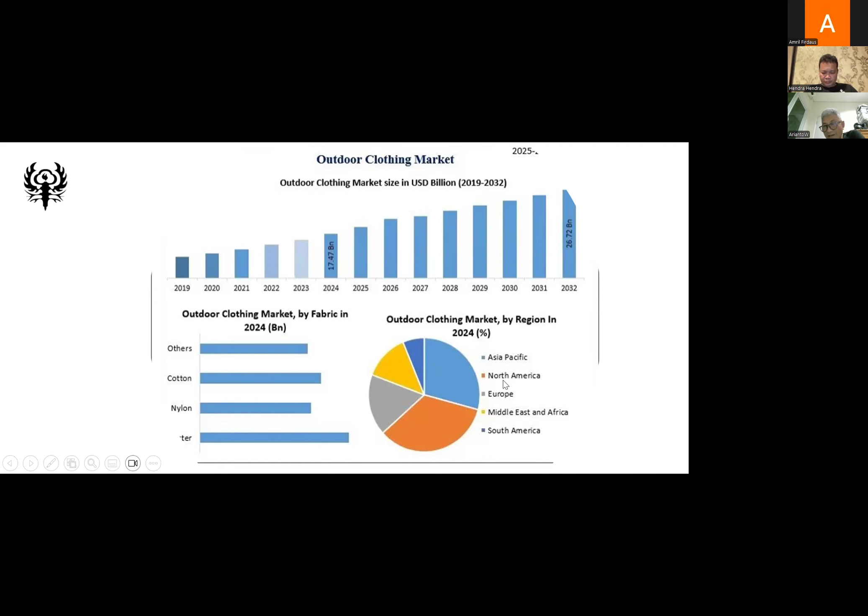So basically, the research uses spacer knit fabric, and they coat it with fluorocarbon resin in an acrylic paste. This process enhances the waterproofness and also the breathability of the fabric, as well as the durability as expected.

The agenda: I've introduced the fabric, and now it will move to the methodology of what they're doing for the spacer fabric, then coating, etc., and all the testing, leading to the results and discussion.

So here we go, we start with the fabrics. This is the fabric they use: double face spacer knit, with the inner face using cotton fibers for comfort, the outer face using polyester, and the spacer using polyester multifilament yarn.

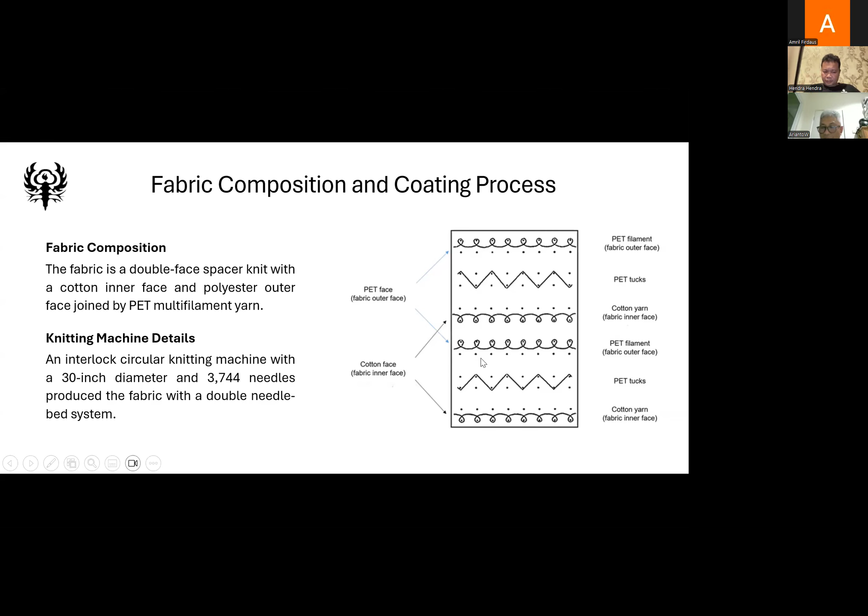Then this fabric goes through the coating process on the polyester face, using 2.7% fluorocarbon resin in 412 grams per meter square of acrylic paste, using screen coating. The samples were dried for 20 minutes at 90 degrees Celsius, then reticulated at 150 degrees Celsius for about 14 minutes.

They use a screen mesh as shown in the diagram, with 26 holes where the pores are in the form of a rectangle. So the resin will be filled into the pores at the polyester side.

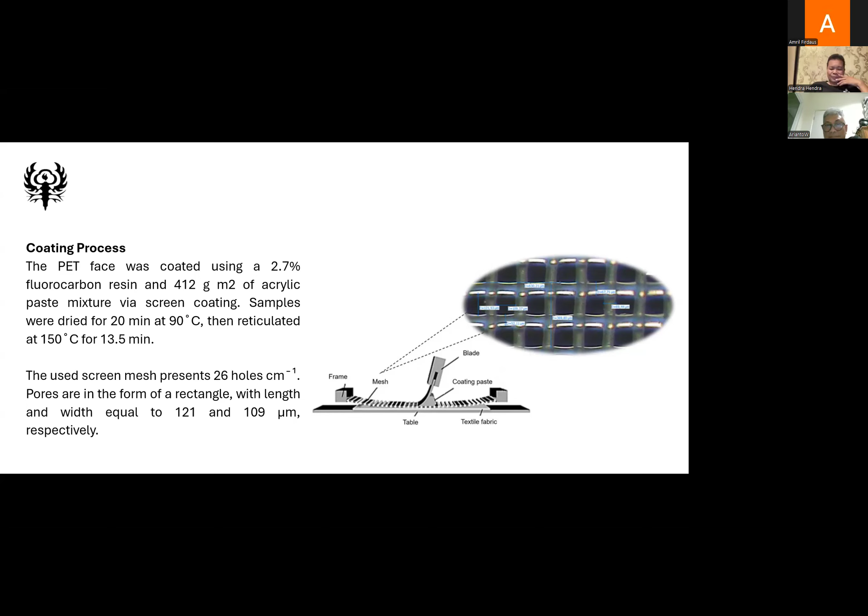So after they finish the fabrics, it goes to evaluation and testing. The objective of the research is to know if this kind of fabric will be durable in real application, so they do some testing.

Before that, they measure the characteristics of the spacer fabric before coating—measuring the thickness, also the titer of the cotton as well as the polyester multifilament, and then also the consumption.

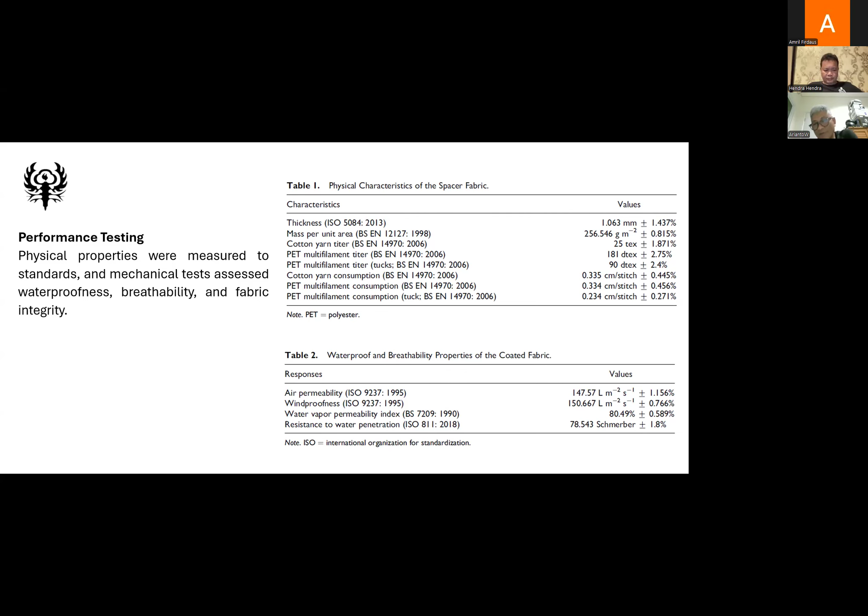It is proven that after coating, the fabric becomes waterproof while still remaining breathable, as measured by air permeability and water vapor permeability. You can see the scores—the waterproofness and windproofness—definitely, it will also function along with the waterproof properties.

And from the same visual, we can see at the left-hand side is the fabric construction. At the top is the fabric before coating, and the bottom is the material after coating. So you can see the fabric, yarn and fiber itself before and after coating. You can see visually by SEM that the material has been coated.

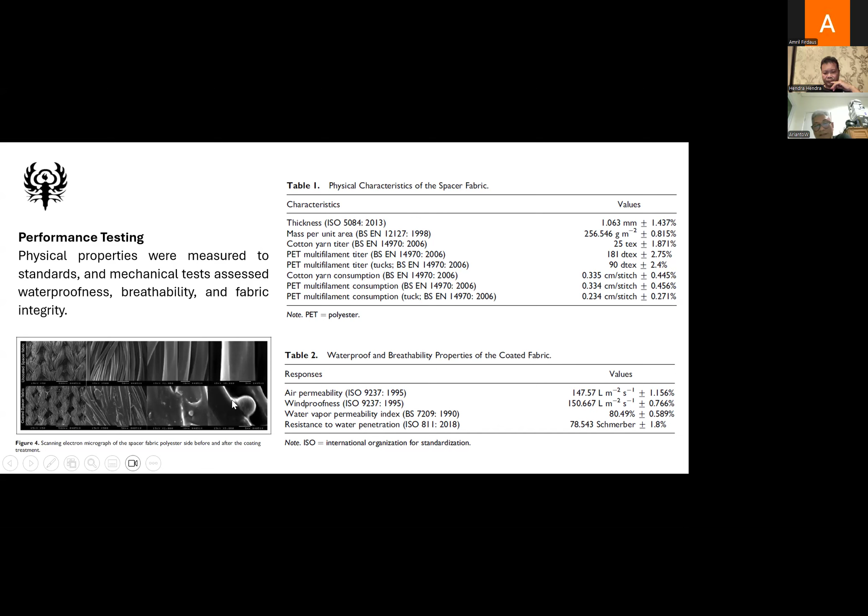Okay, so to prove the objective of the research, they conduct some mechanical testing. The first one is tensile strength, using a Lloyd LS5 machine. They also test the abrasion using Martindale, the fabric stiffness measured using cantilever test, and the recovery assessed by Shirley.

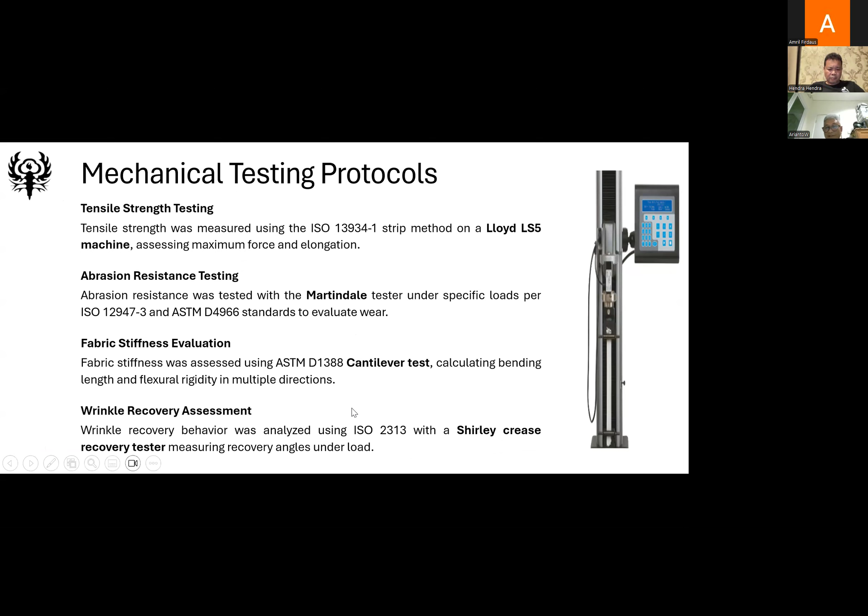So for the coating interface, we can see from the SEM that the coating fills the spaces between the fibers, between the polyester multifilament fibers.

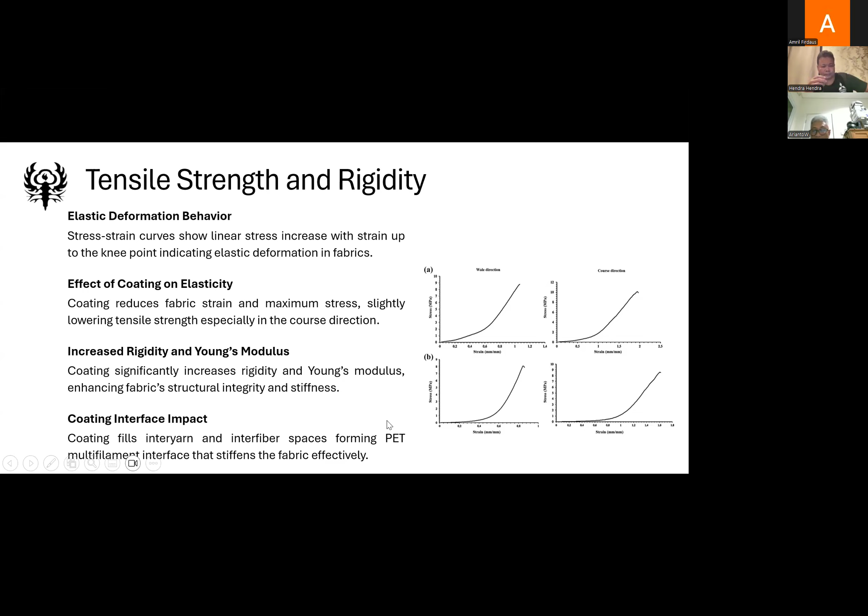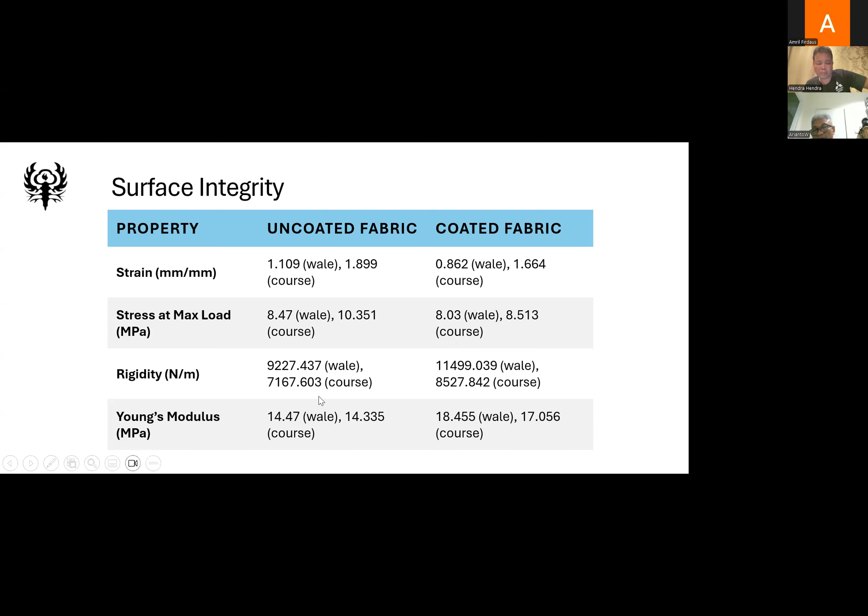And then for the second assessment of surface integrity, we can see a comparison between before and after coating the fabric - both stress and strain decreased a little bit, but the fabric becomes more rigid significantly, as well as the Young modulus also increasing quite significantly.

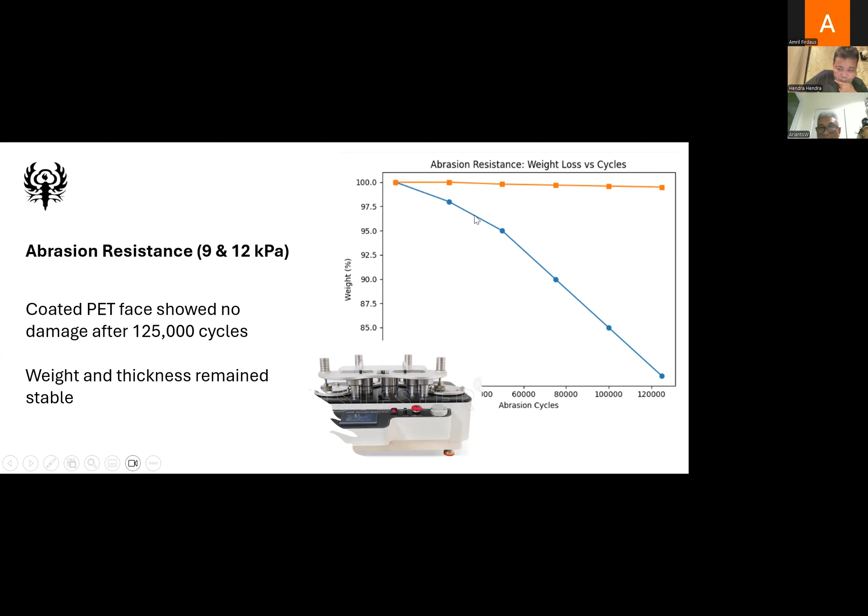Based on the abrasion resistance test, they conducted it two times by 9 and 12 kilopascal. From the diagram we can see that even after 125,000 cycles of the test, the coated polyester face did not occur any damage, as well as the measurement of weight and thickness also remaining stable. The orange line is the coated fabric, and the blue line is the uncoated fabric, so we can see the significant difference affected by the coating process.

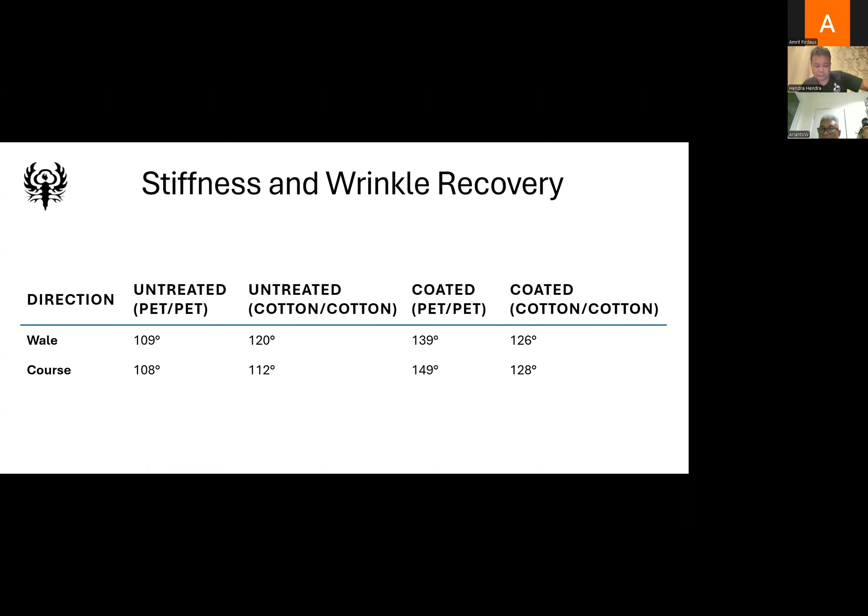And the last one is stiffness and wrinkle recovery. We can see from the angle of the test that the fabric before and after treatment, on both wale and course direction, being increased. That means the fabric is better recovered from the wrinkle.

So they concluded that the mechanical property by the coating has been enhanced by the rigidity and the Young modulus. And the abrasion resistance also has been proven durable, resistant. And they conclude that this kind of fabric is deserved to be used for outdoor wear, something like that. So based on the evaluation, the fabric has durability as well as comfort for clothing and protection.

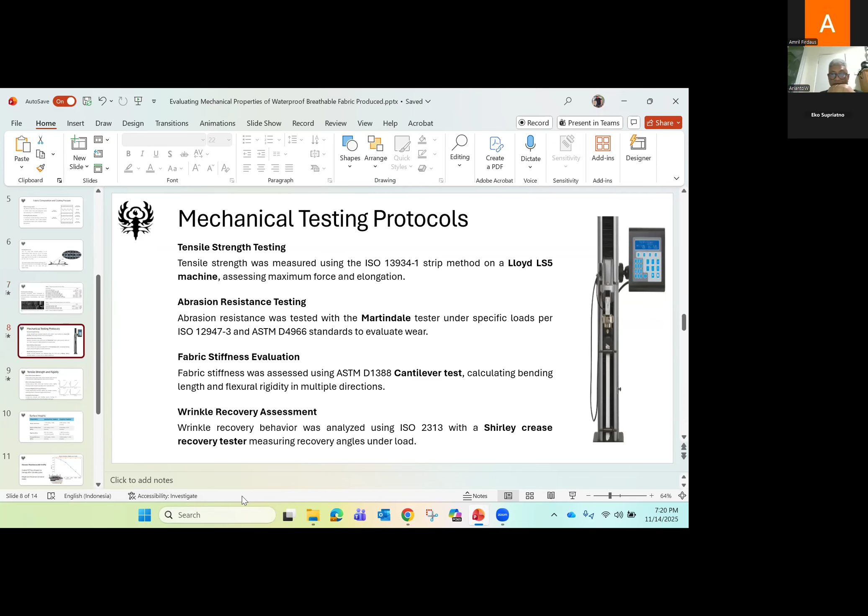So we have, I don't know, maybe 17 students. I don't know if I missed something, but do we have a result for the waterproofness? Result of what? The waterproofness result.

This is the result actually, right? Resistant to water penetration. So after the process, it's measured. To be honest, I don't know what that column means, but it was measured. The waterproofness was measured here, and definitely the windproofness as well.

And is there no other test, like a rain test? The ratio is different. Hydrostatic pressure, I didn't find it in the paper. Okay, I think probably overall the objective is clear.

Pak Yudi, maybe in the beginning you explained about the market of this product, right? Yes. So I want to know, is this product able to be produced in Indonesia, and if yes, which company produces this product?

It's out of topic, Pak. I know, anyway this is out of topic, but you mentioned in this slide that... No, the market, because the paper also mentioned about the background of the research because of the market.

Okay, so now just adding some updates on the market situation. But it is a very good concern, it probably can help the textile business in Indonesia if we can go into this market, because the demand is very high, definitely. We can see all people are very optimistic about how to grow in the coming 10-20 years for this industry.

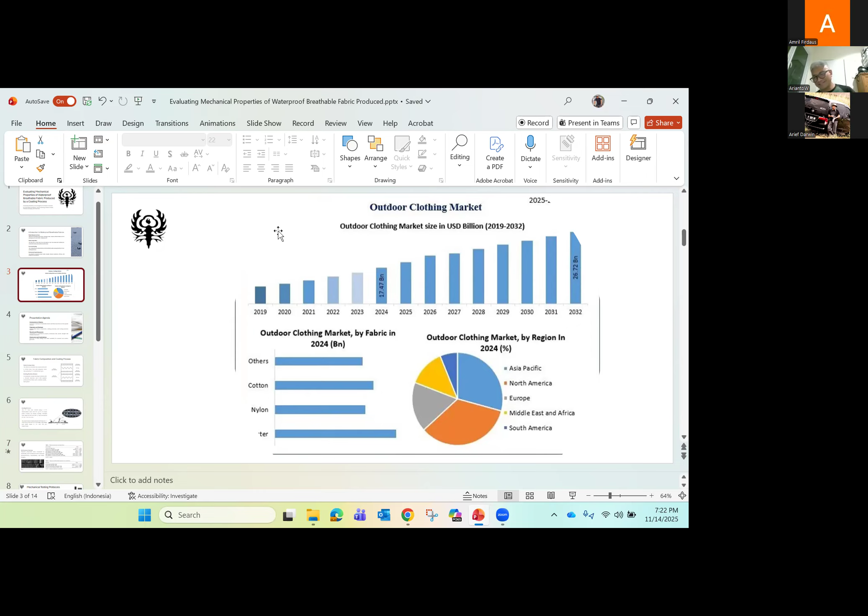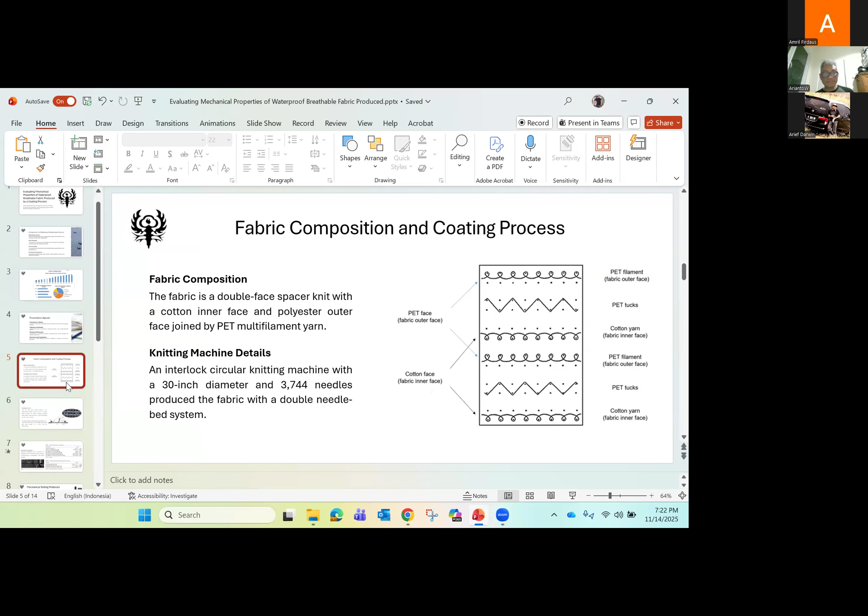Yeah, and I have a question for you on your first slide. Maybe you can scroll up a little bit. Yeah, this one. No, maybe down. Again. One more. Okay, stop, this one? No. Go back, yeah, this one.

I think this is a little bit, I'm not sure whether this is the 412 gram per meter square. It sounds very, very heavy, it looks like more than the weight of the fabric itself. So the coating normally ranges from 20 up to 40 GSM. Yeah, okay, maybe this is wrong numbers.

And in fact, Indra, for the type of coating that you mentioned in this paper, definitely it can be done in Indonesia.

Libolon can do - wait, I see. Pak Arif is the expert, Pak. No, he doesn't work for this industry. I am the user, not the manufacturer of this fabric. I'm the user.

So Pak Arif, you mean that the 412 is too high? Too low? Too heavy, too much. I see. Okay, this should be in GSM. Oh, so it's too heavy.

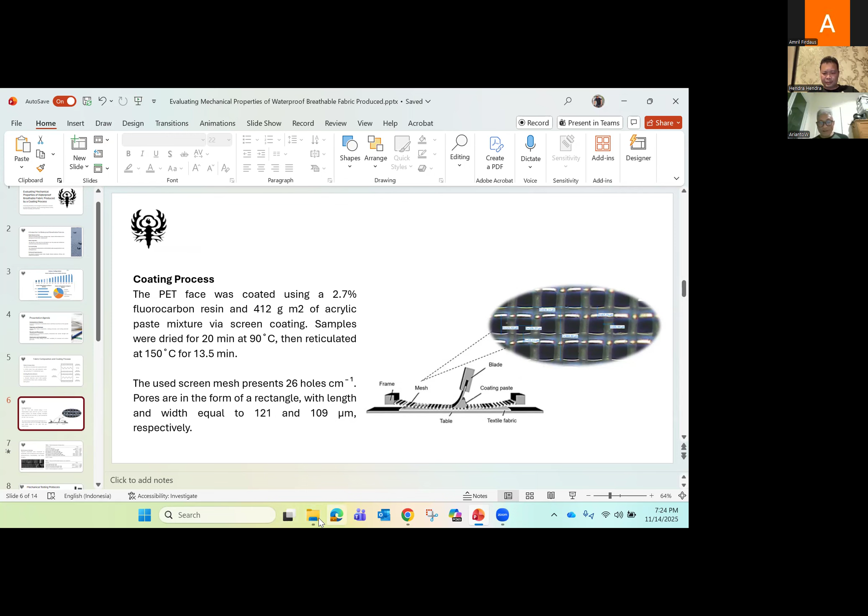Okay, so maybe Pak Yudi can double check the gram per square according to the paper, whether this is correct or not. First coating normally only around 20 up to 40 GSM. Okay, let me check it out. It should be from this one.

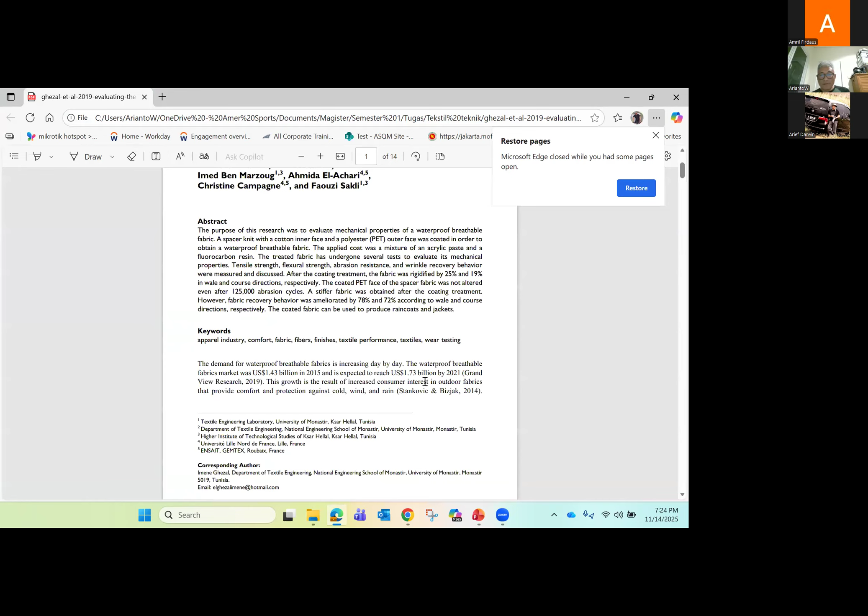Where is that? Maybe Pak Yudi, you can use Humata AI and ask about the grammation. Yeah, this one is correct. Okay, it's saying that. Can you make it bigger, Pak Yudi? I cannot see. Oh, you cannot see.

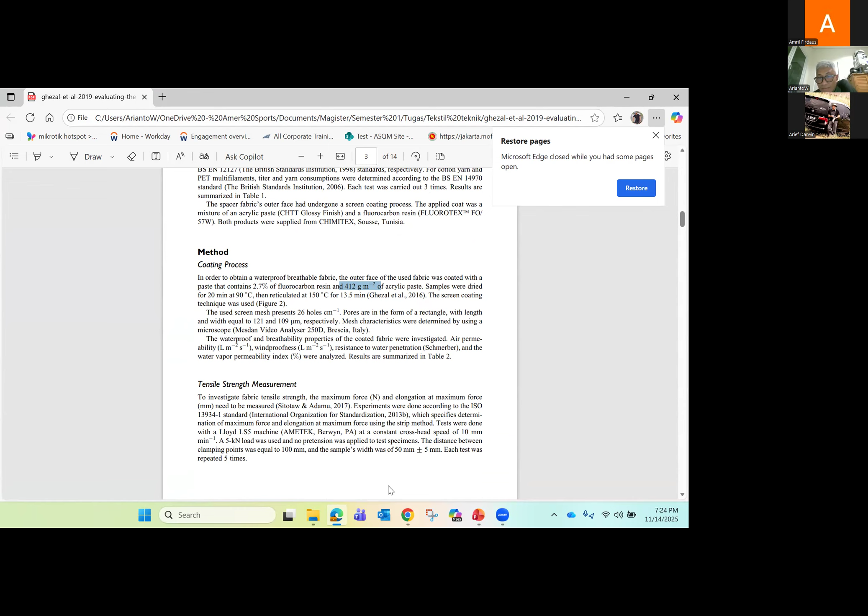Yeah, it says 412 gram per meter squared, but this is definitely wrong numbers - no coating with 412 GSM. You can imagine the fabric itself, maybe not even 400. The fabric is not until 400 grams. It's almost half a kilogram, right? Very heavy fabric.

Good sketch, Pak. Okay, it's a good lesson. Is there any question? There's a -2 above the meter - maybe that is the meaning. It's meaning per meter square, gram per meter square, minus 2. Oh yeah, -2 means per.

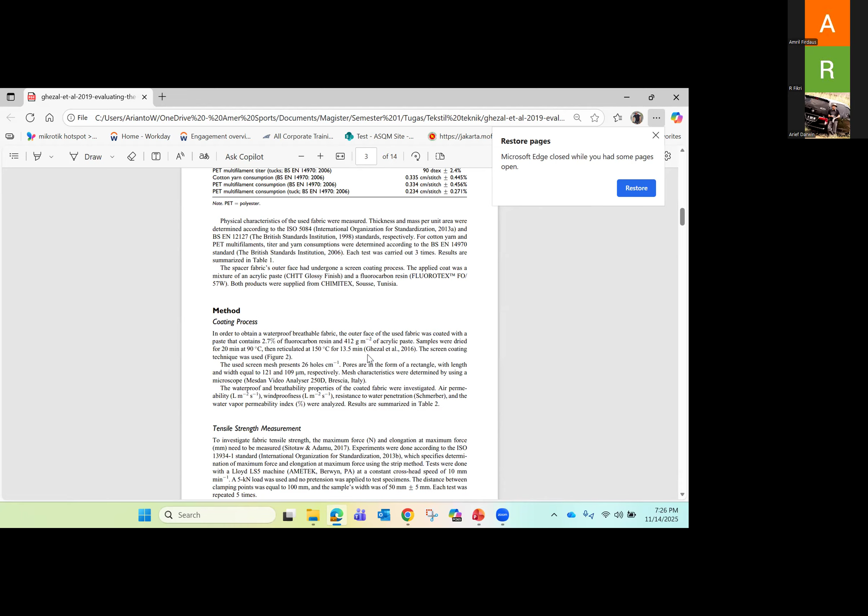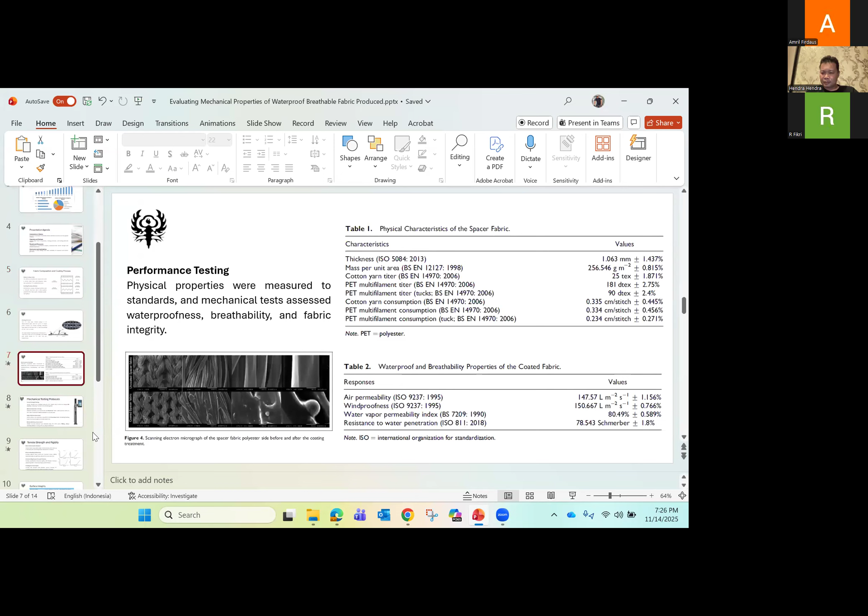Reduced, lower, reduced a little bit. Is there any explanation why the tensile strength is reduced after the coating process? Maybe they mention something why the tensile strength is reduced. I haven't found it. So is it possible that the material becomes a little bit brittle because of the coating process?

When the material is brittle, then the tensile strength is reduced, right? You mean stiffness, yes. Is it the increase in stiffness? It mentions that the fabric becomes stiffer. Maybe that is the reason why the tensile strength has dropped - on the other side, the stiffness is increased.

Yes, okay, it's more rigid, right? It says rigidity is increasing significantly, because of the resin applied into the fabric.

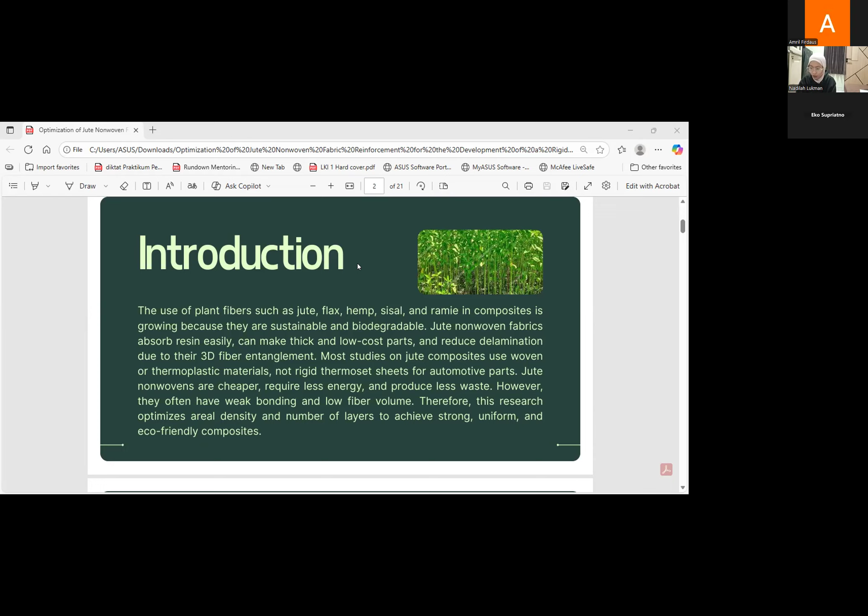The simple background for this paper is they want to make the composite using jute nonwoven, to get a strong, uniform, and eco-friendly composite.

So this is the experimental part. In the paper, they mention 5 parts of the experimental: first is the material, second is nonwoven preparation and properties of nonwoven fabric, experimental design, and the last is preparation of the composite.

The materials used in this paper are Fiberbond B554, methyl ethyl ketone peroxide, cobalt naphthenate, and of course jute fiber.

Before they make the composite, we must prepare the jute nonwoven first. All nonwovens in this paper were prepared by a Dilo machine, like the machine from Germany. This Dilo machine consists of a carding machine, a cross-laying machine, and a needling loom.

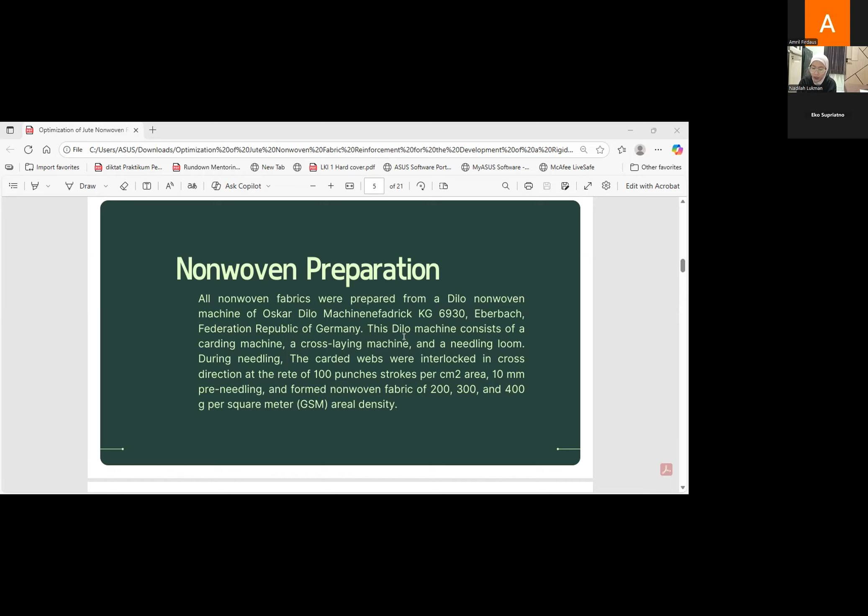During needling, the carded webs interlock in the cross direction at a rate of 100 punch strokes per square centimeter area, with 10 millimeter pre-needling, to form nonwoven fabric of 200, 300, and 400 grams per square meter (GSM) areal density or grammage.

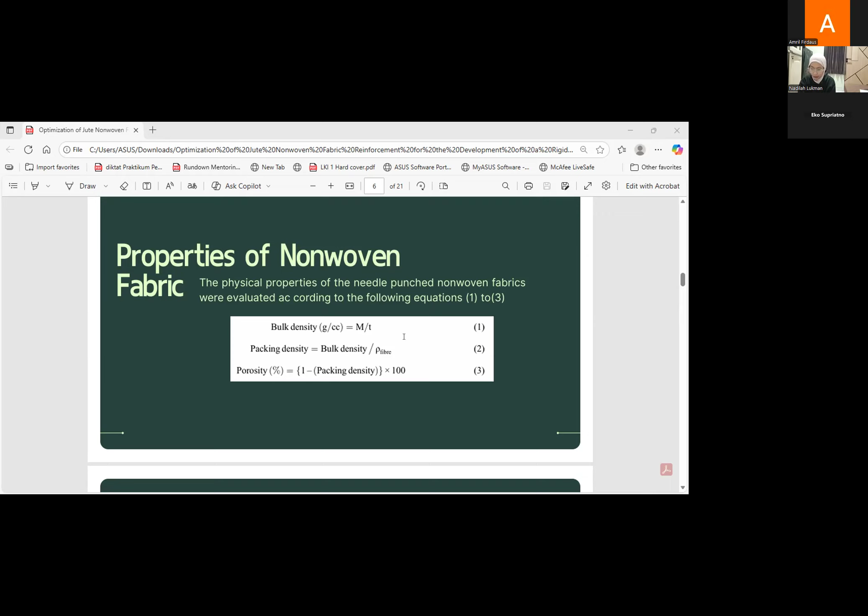To evaluate if this nonwoven is in good condition, they use a formula to evaluate bulk density, packing density, and porosity.

The next part is experimental design. For this paper, they use the Taguchi method. Taguchi method is a method for optimizing experiments - you can look it up on Google or ChatGPT. In this paper, the Taguchi method is used to plan and optimize the experiment using a special design called the orthogonal array.

In the Taguchi method, there are 4 main steps: first is design experimental, second is analyze data, third is finding the best process condition, and the last is verification of the result.

In this study we just focus on two factors, ignoring others. The first is areal density, the second is the number of layers. Areal density varies between 200, 300, and 400 GSM, with 3, 4, and 5 layers.

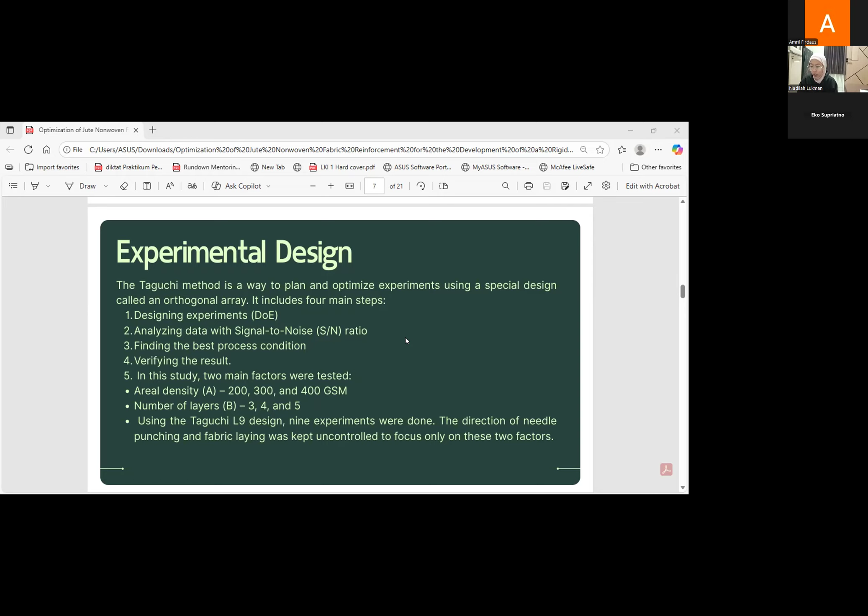Using the Taguchi method, this is called the Taguchi L9 design. 9 experiments were done. The needle punching direction and fabric layering were kept uncontrolled to focus only on these 2 factors.

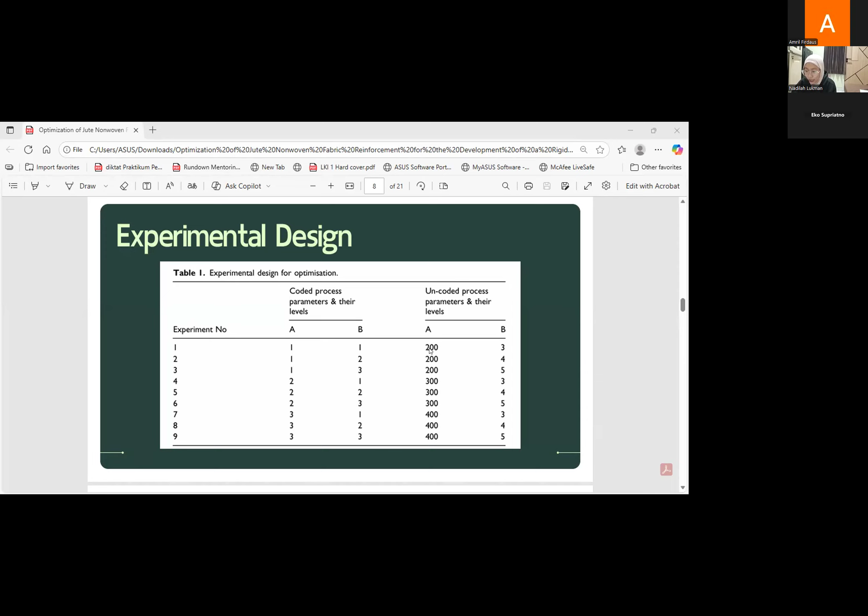This is the table of the experiment with the Taguchi L9 method. This is the sample number, and this is the process code - A is the areal density or grammage, and B is the layering, how many layers in the composite. For example, experiment number 1 has grammage of 200 with 3 repeating layers.

After we finish making the non-woven jute, we start preparing the composite. The composite was prepared using the typical hand lay-up method, followed by compression molding.

We use jute non-woven fabric, made in 60 by 60 centimeter size, dried at 70 degrees Celsius for 2 hours. Then unsaturated polyester resin was mixed with cobalt naphthenate at 2% and methyl ethyl ketone peroxide at 2%. The resin and reinforcement ratio was 1:4, where 1 is the fiber and 4 is the resin.

Next, the resin mixture is applied by brushing and rolling evenly on the fabric. I can show you some pictures for this process. Then comes the resin coating layer — the fabric is stacked in one direction and placed between polyester sheets.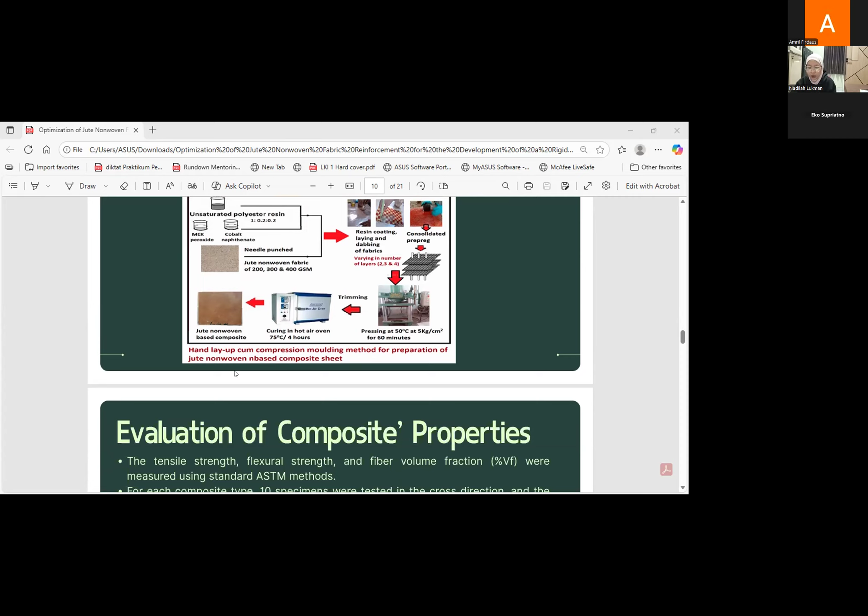Next is the evaluation part of this paper. They used 3 evaluations: tensile strength, flexural strength, and fiber volume fraction, using standard ASTM methods. For each composite type, 10 specimens were tested in the cross direction, and the average value was recorded. Tensile strength was measured using the Instron, flexural strength by the 3-point bending test, and fiber fraction calculated by formula.

Density in this paper was calculated using the Archimedes principle. Lastly, they used SEM analysis to observe the fiber-matrix bonding and voids in the composite sample.

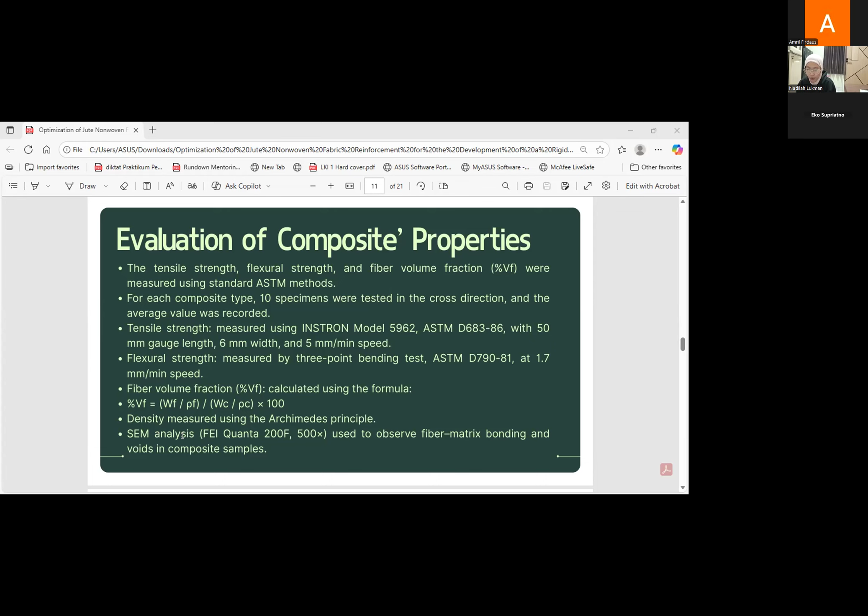This paper uses the Taguchi method L9. After getting the testing results, we must optimize the data. We optimized the data using Minitab 18 software, which can calculate research data.

Basically, the hand lay-up and compression molding method requires skill, work, and time. But with the Taguchi method, the process becomes faster and cheaper for this paper. The signal-to-noise ratio was calculated using the rule 'larger is better,' so in the results we focus on the larger value.

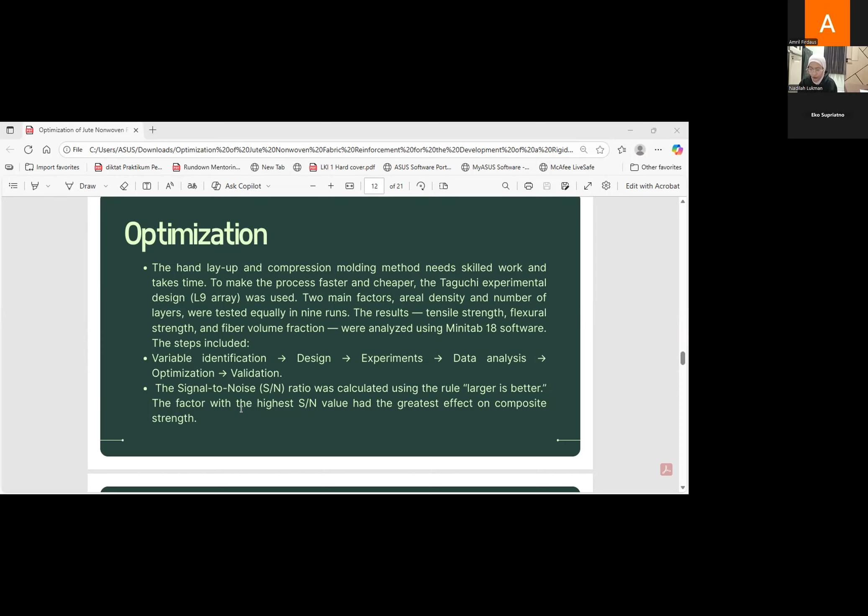Next, I want to explain the results in this class. The results discussion has three parts: properties of the non-woven, properties of the composite, and testing of the composite.

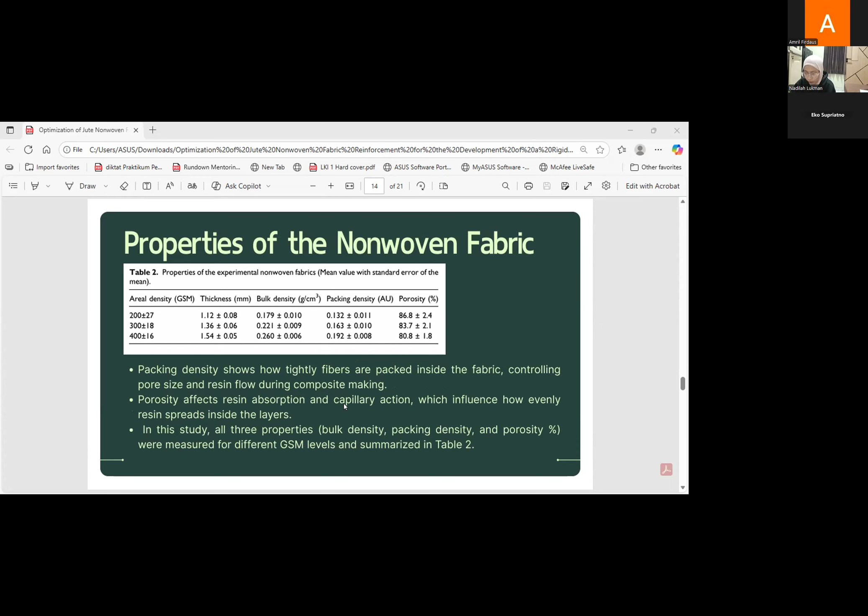This is the property table of the nonwoven fabric. Here they made a summary table explaining the mean value with standard error of the mean. You can read about thickness, bulk density, packing density, and porosity in this part.

Now I want to explain the evaluation of tensile strength of the composite. Tensile strength depends on the strength, amount, and direction of the fiber, and how well they bond with the polymer matrix. In this study, higher areal density increased tensile strength because more fiber carried the load. However, adding more layers reduced strength due to poor stress transfer between them. Our study succeeded in improving fiber-polymer bonding, and fiber interlocking gave a stronger, more uniform structure.

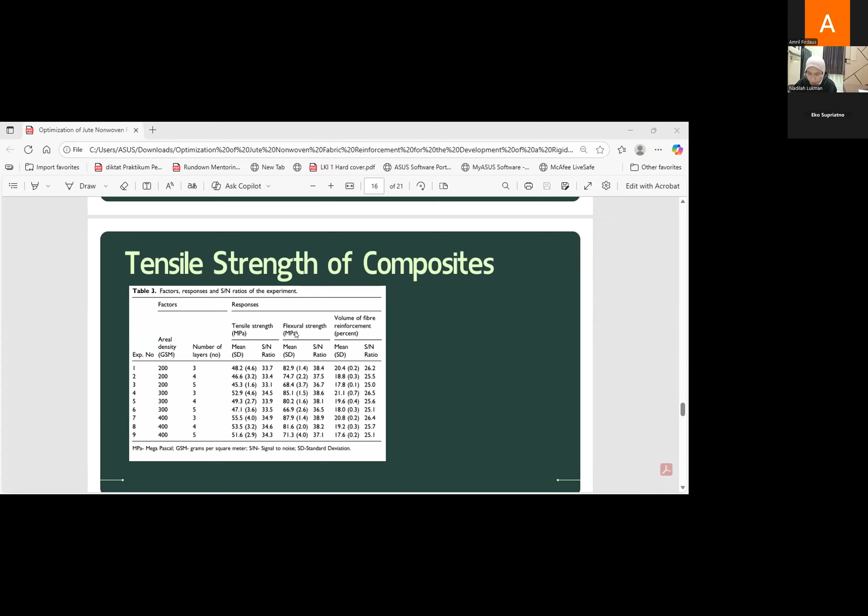You can see the tensile strength value here, guys. This is the result value from the testing — tensile strength, flexural strength, and volume of reinforcement.

As I said before, larger is better. So we can see here the larger value is with 400 areal density and three layering repeats — this shows the higher value, guys.

This is the picture for flexural strength of the composite, from the same instrument. You can see here there is a big hole in the 200 GSM sample. All these pictures show three layers, but with different grammage.

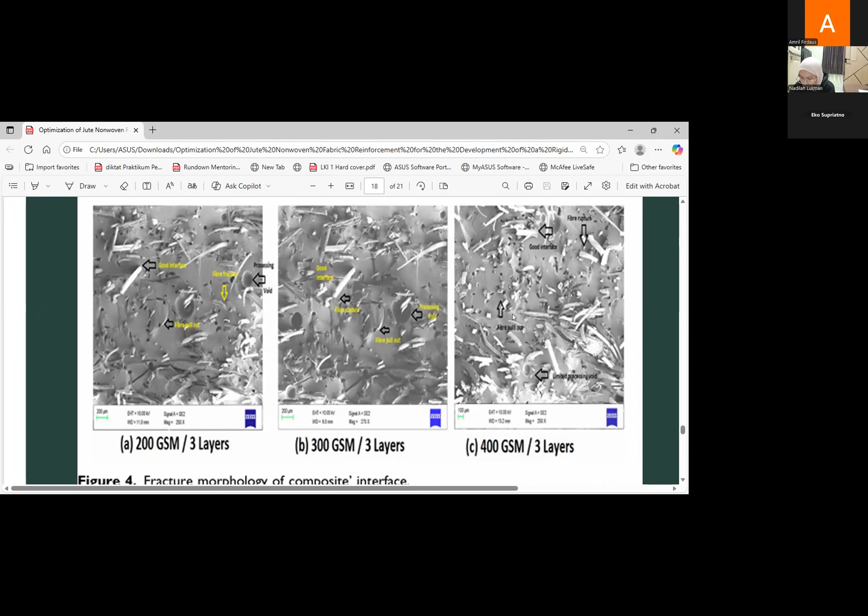In 200 GSM, we can see a big hole, and in 300 GSM we can see a hole too, but not as big as in the 200 GSM. Lastly, in the 400 GSM, we can see this is a small hole.

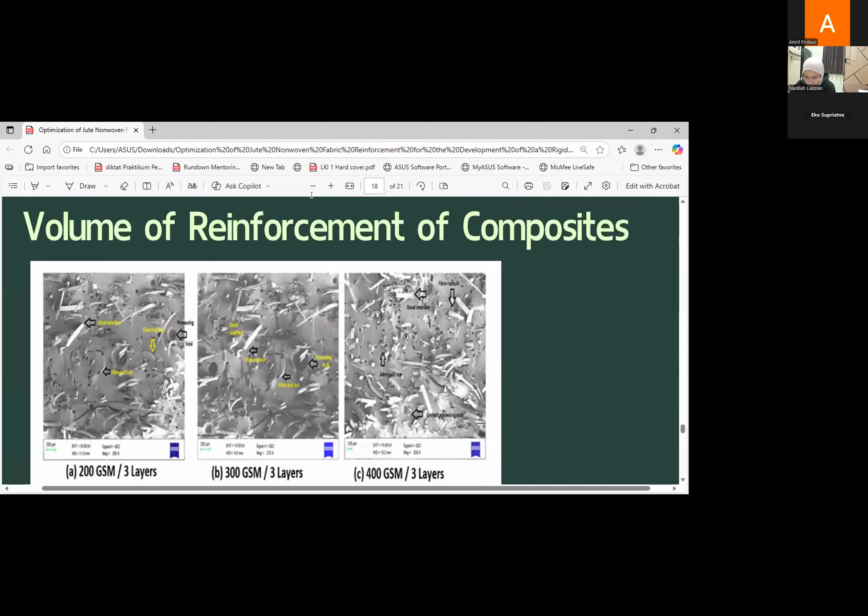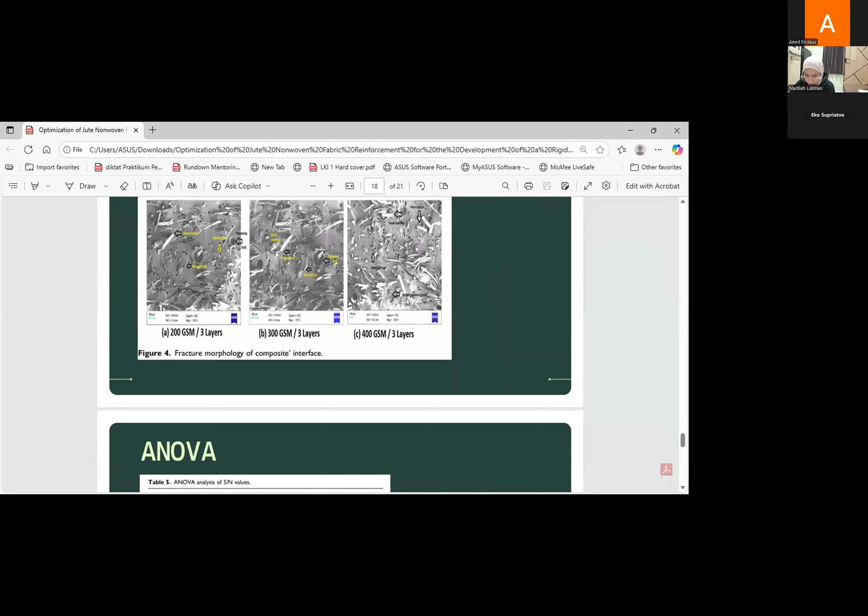So this can give the conclusion that higher grammage is better for reinforcement. In this paper, they used ANOVA to measure and analyze the values.

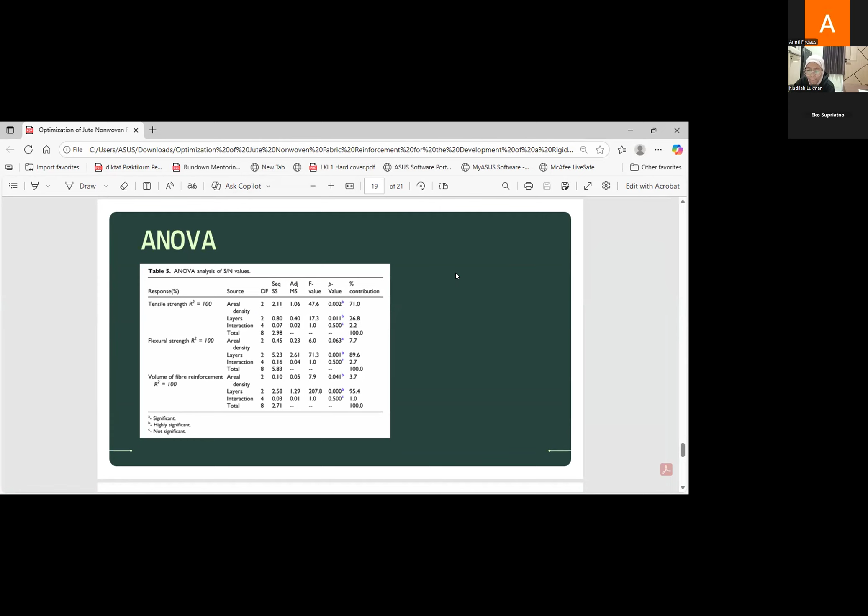So this is the conclusion, guys. In this paper, the conclusion is 400 GSM jute nonwoven in three layers plus polyester resin produced the most effective composite. The optimized composite achieved 55.5 MPa tensile strength and 87.9 MPa flexural strength, with 20.8% fiber volume, meeting automotive specifications.

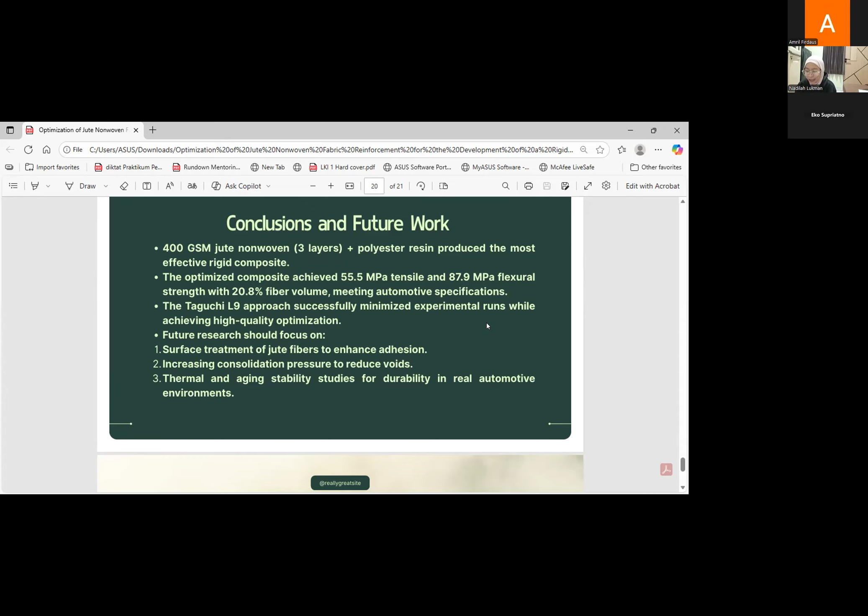This paper explains that the Taguchi L9 approach succeeded with minimal experimental runs while achieving high quality optimization. For future research, they should focus on surface treatment of the jute fiber to enhance adhesion, increasing consolidation pressure to reduce voids, and thermal aging stability studies for durability in the real automotive environment. I know my English is not perfect, but I hope you can understand what I wanted to explain about this paper. Thank you for your attention, guys.

Thank you very much, Nadilah Lukman, for your presentation. I have one suggestion for you to improve your presentation in the future. Looking at your slides, I think you show too many sentences. It's better if you change your sentences into schematic illustrations. For example, can you show me the methodology of this research?

Okay, this is the experimental design. Here in your experimental design, I think it's much better if you use a schematic illustration. How you convert this sentence into a schematic illustration, I already mentioned in my video assignment. You can put this sentence into something like Gemini AI or ChatGPT and ask them to generate a schematic illustration for this sentence. They will generate it, and then you have to double check whether the schematic illustration given is suitable with the sentence or not.

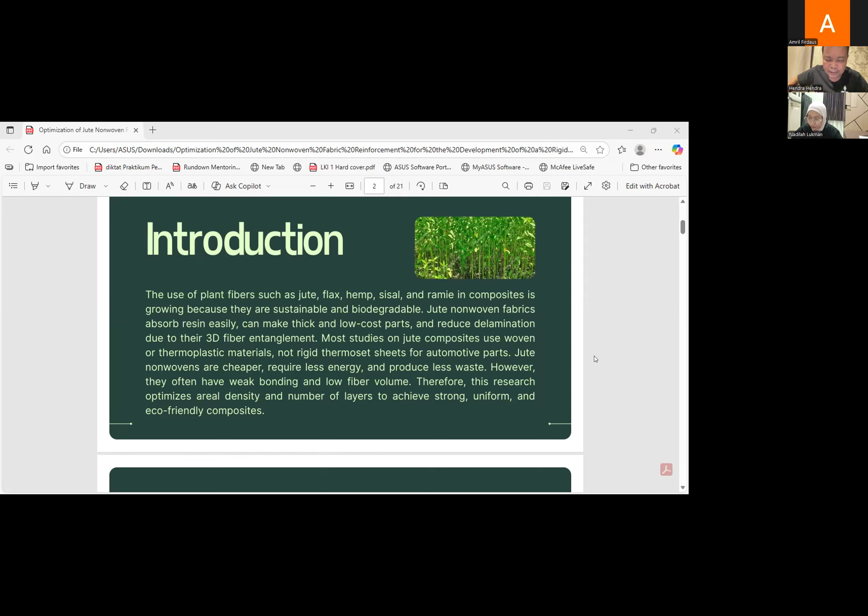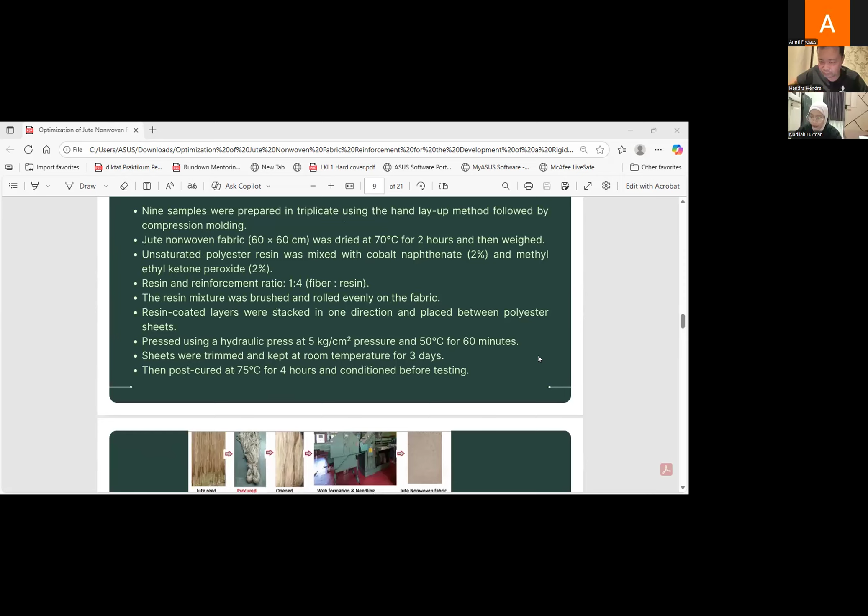As you mentioned, the gram per square of this composite can be adjusted from 200 gram per meter square, 300, and 400, right? Yes. Then my question is, how do we adjust this grammage? We can adjust using the Dilo machine, making the jute non-woven fabric. For 200, 300, and 400 GSM grammage, we can set it in the Dilo machine. The Dilo machine can measure the grammage based on the data we input. So you mean the 200, 300, and 400 can be adjusted from the manufacturing itself, right?

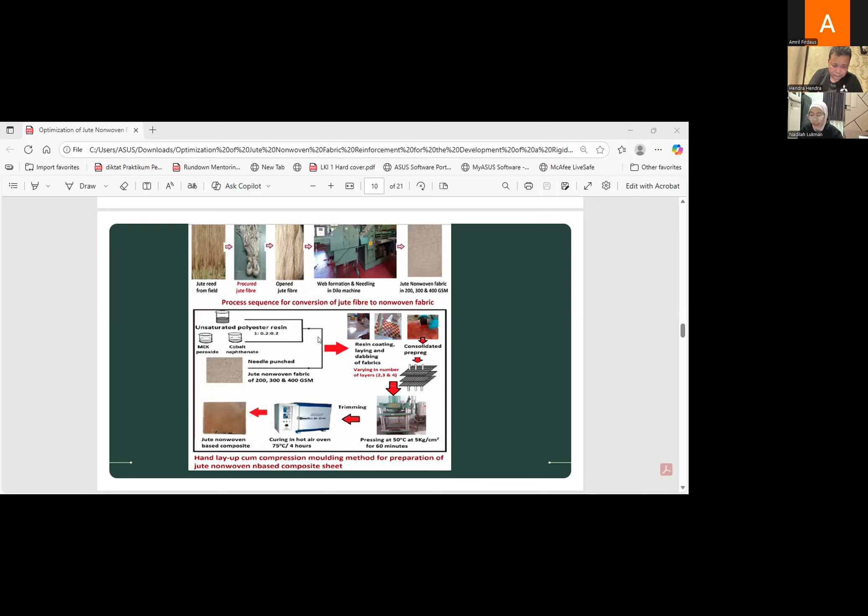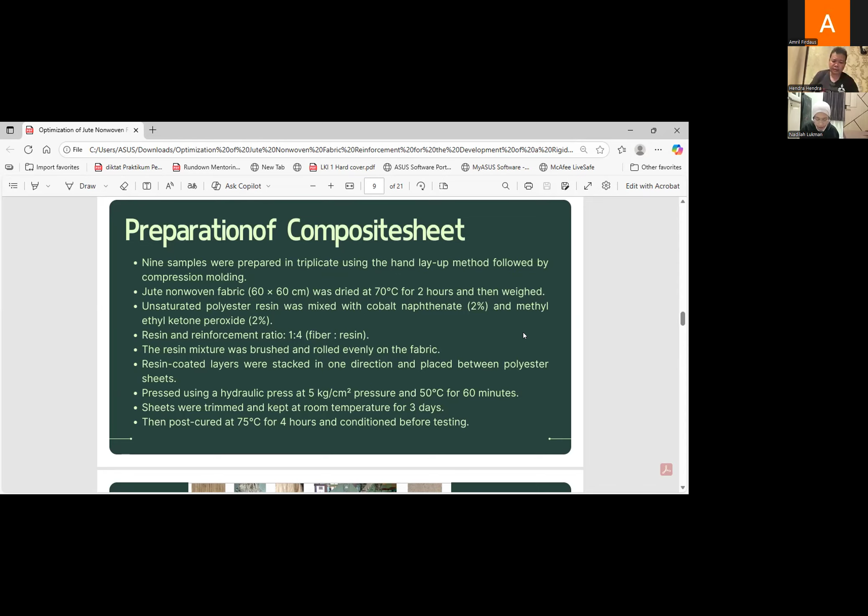Yes. So my next question is, how about the composition ratio between the jute fiber and resin used? Is this ratio by layering? No, this paper used three layers. I mean, if we use 200 gram per square, how many grams of jute and how many grams of resin? Are you using polyester resin or epoxy resin? Polyester resin. Okay, we have to see the ratio, I think before it was 1 to 4. One for what and four for what? One for fiber and four for resin. Oh okay, 1/4, so this is the ratio, right? For example, 1 gram fiber would be 4 gram resin. Is that correct? Yes, correct.

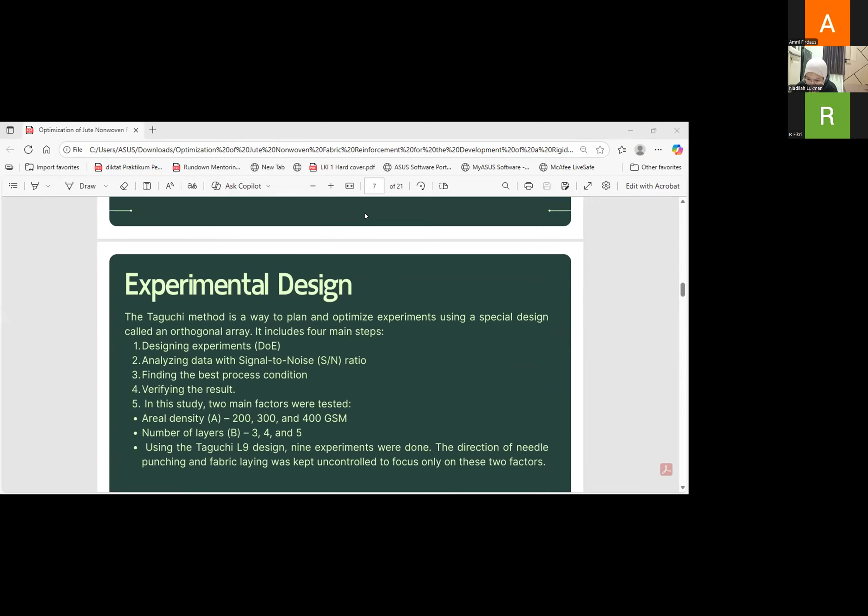Is there any other question? I have one question. In the table, you have 200 gram 3-layer, 200 gram 4-layer, 200 gram 5-layer, and so on, also with 300 and 400 gram. So the question is, why was 3-layer chosen, not 4-layer, not 5-layer? And I see that the bigger the layer, the strength becomes lower.

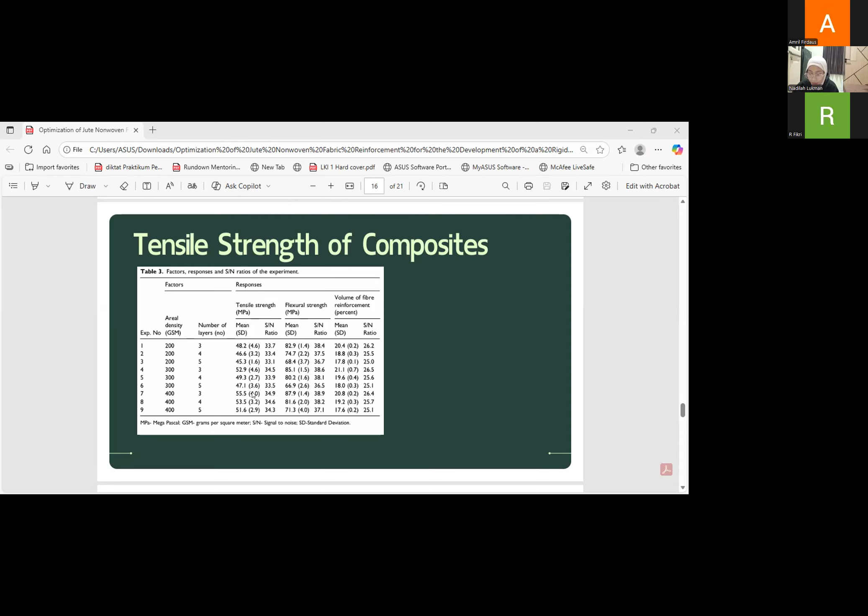If you can see the table, not here, below, go down. Yeah, this one, you can see, 3-layer. So after this slide, the experiment always used 3-layer because I can see that if using 4-layer and 5-layer, the strength becomes lower. So is there any explanation why it becomes lower if we add the layer? I saw this before.

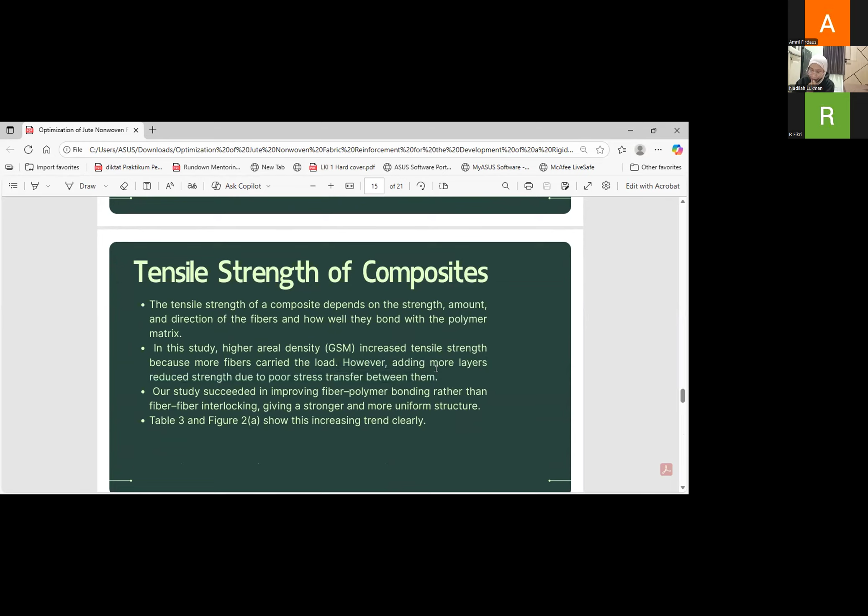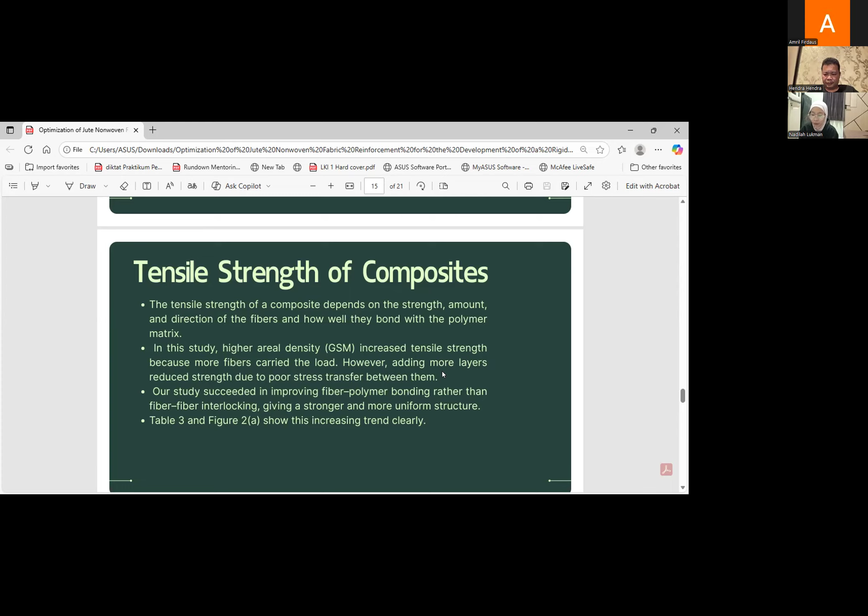In this study, higher areal density GSM increased tensile strength because more fiber carried the load. However, adding more layers reduced strength due to poor stress transfer between them. So I think if we're adding layers, like 3 layers versus 5 layers, the 5-layer composite can have more stress, more pore stress. So with a big grammage like 400 with big layering, that can make the composite have poor stress because the density is very high. If the high grammage is combined with high layering, it can make the composite have poor stress, so adding layering gives lower values like tensile strength and flexural strength, because the volume fraction of fiber reinforcement goes down. I think that's the reason.

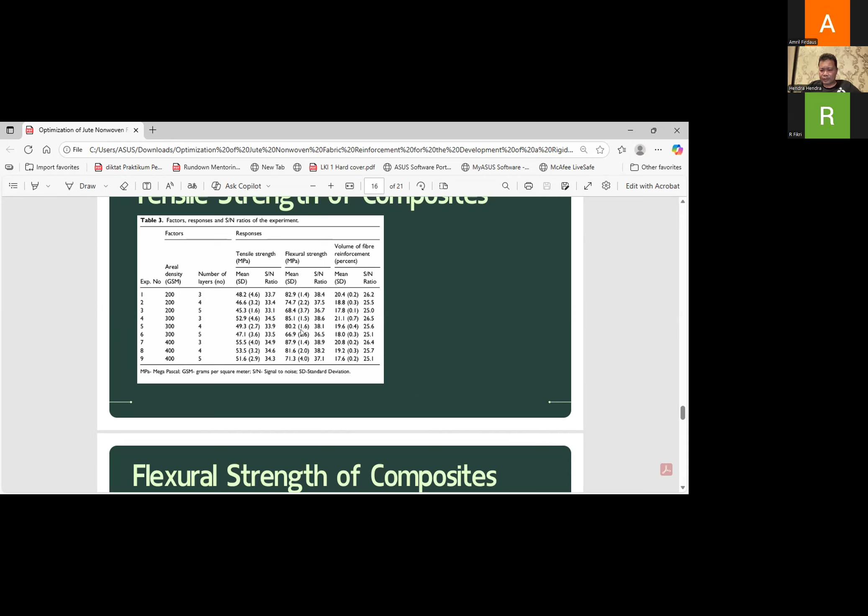Okay, Nadila, my next question is that you mentioned the manufacturing of this nonwoven uses the carding machine, right? Yes, the Dilo machine. Can you show me the process in the carding machine?

When we use the carding machine, the fiber becomes more aligned, is that correct? Yes. So my question is, if the fiber is aligned into the machine direction, I want to know how they deposit this structure, for example in the three layers. In the first layer, do they put the layer in the same direction or different direction? It's the same direction. In the Dilo machine, we just make the jute non-woven, and we layer in the different machine.

So it means that when we stack three layers of this non-woven, all fibers are in the same direction, right? Yes. Okay, my question is, if we measure the tensile strength, we can measure in two directions: one in the fiber direction, and another one perpendicular to the fiber direction. If we measure in the fiber direction versus perpendicular to fiber direction, so what happened with the tensile strength, cross direction?

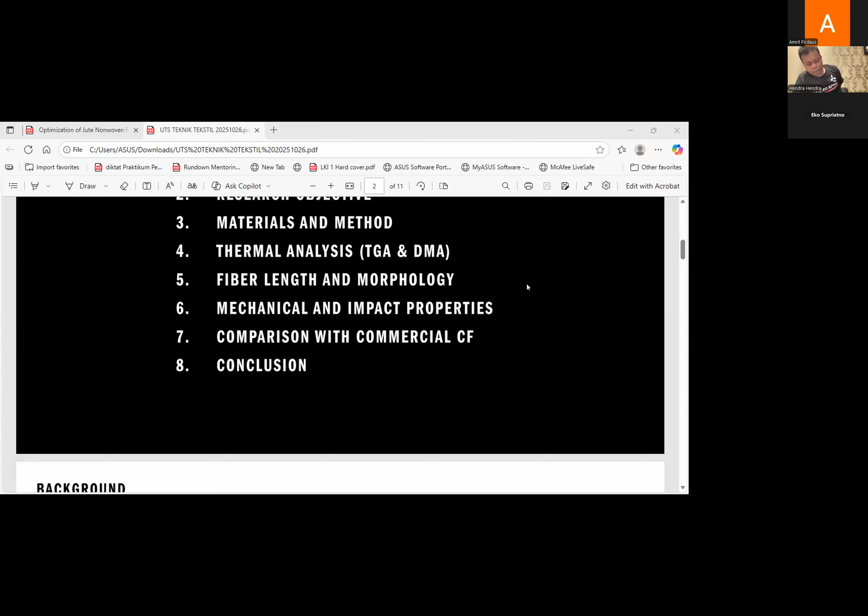I will describe the main goal and questions addressed in the study, then continue to the materials and methods, where I will briefly discuss how the research team produced and tested the composite using different carbon fiber loadings. After that I will look at thermal analysis, including TGA and DMA, then focus on fiber length and morphology, where we will see the fiber structure and bonding. Finally, I will close with the conclusion, summarizing key findings and future potential of this type of composite. That is the content for this evening - let's move on to the background.

So we all know that the industry today is under constant pressure to improve energy efficiency. In automotive manufacturing, one of the most effective ways to save fuel is by reducing the vehicle weight. The lighter the vehicle, the better the energy efficiency. So every kilogram saved can translate to measurable fuel economic gains.

Then what is the purpose of carbon fiber? Carbon fiber composites are perfect for this. They are a combination of low weight or lightweight, high strength, and excellent stiffness. But again, they are expensive because of the feedstock or raw material, complex production process, and so on.

That's where textile grade carbon fiber, or TCF, comes in this paper. TCF is made from textile grade feedstock or raw material, which is cheaper and easier to process. Although the properties are slightly lower than aerospace grade fiber, they are still strong enough for many industrial uses, like automotive, and much more affordable.

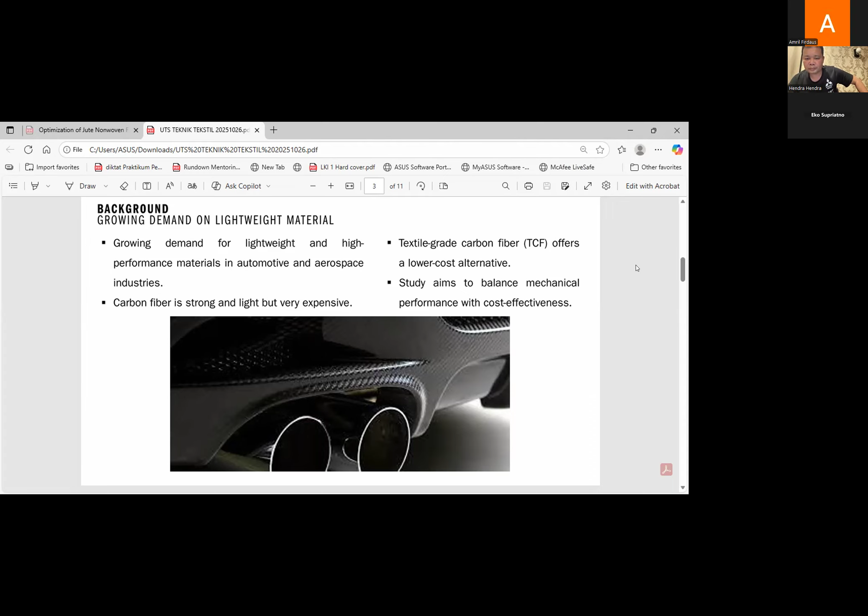Now moving on to the research objective. The study had a very clear goal: to evaluate the mechanical and thermal properties of polypropylene reinforced with textile grade carbon fiber at different fiber content. Specifically, the research created composite samples containing 1%, 5%, 10%, and 15% of TCF by weight.

Using what they call a twin screw extrusion process, this process ensures that fibers are well mixed into the polymer matrix before molding into test samples.

They then examined several aspects. First is mechanical properties, including tensile strength, flexural strength, and impact resistance. Then thermal properties using TGA and DMA, dynamic mechanical analysis, and also morphology through scanning electron microscopy, or SEM, to observe how the fibers are distributed and bonded inside the matrix.

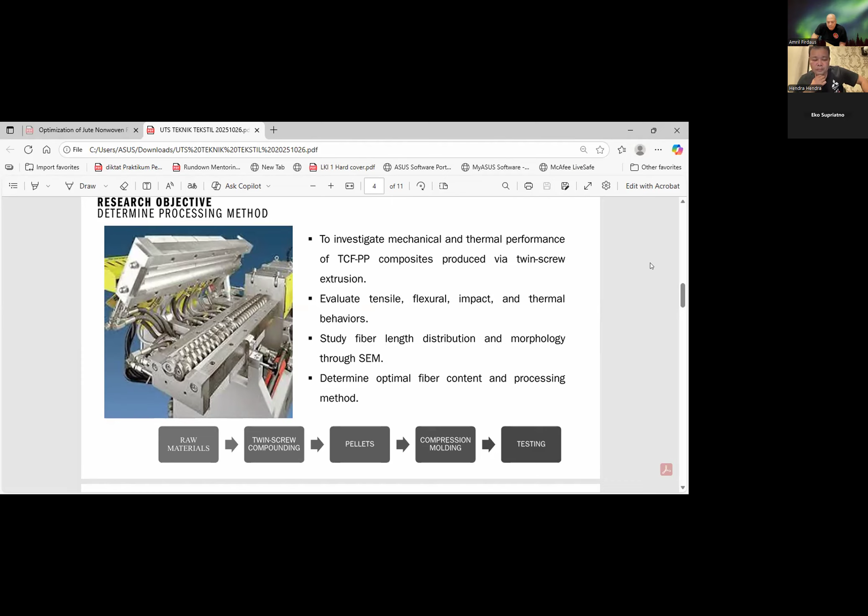The ultimate objective was to determine how much textile grade carbon fiber can be added to the polypropylene before the benefits start to drop. Essentially, identifying the optimal loading and the best processing while balancing strength, stability, and cost. So this research, once again, was not just about testing—it was also about exploring practical manufacturing insights that can be applied in real industry processes.

So this is about how they prepared the material and conducted the experiments. They used two main materials. Like I explained earlier, first is polypropylene, or PP—a common thermoplastic polymer you know, with a melting point around 170 degrees Celsius.

And the second material is the textile grade carbon fiber itself, produced at what we call the Oak Ridge National Laboratory in the United States, with a fiber length of about 6.35 millimeters.

The composites were manufactured using a twin screw compounding system, like I explained earlier, which is very common in the plastic industry, with 4 different formulas prepared: 1%, 5%, 10%, and 15% fiber by weight.

In the process, the PP pellets are melted—normally PP is in pellet form—and then melted and mixed with the short carbon fiber inside the extruder. The result is a series of compounded pellets that are later molded into flat plaques through injection compression molding, or ICM.

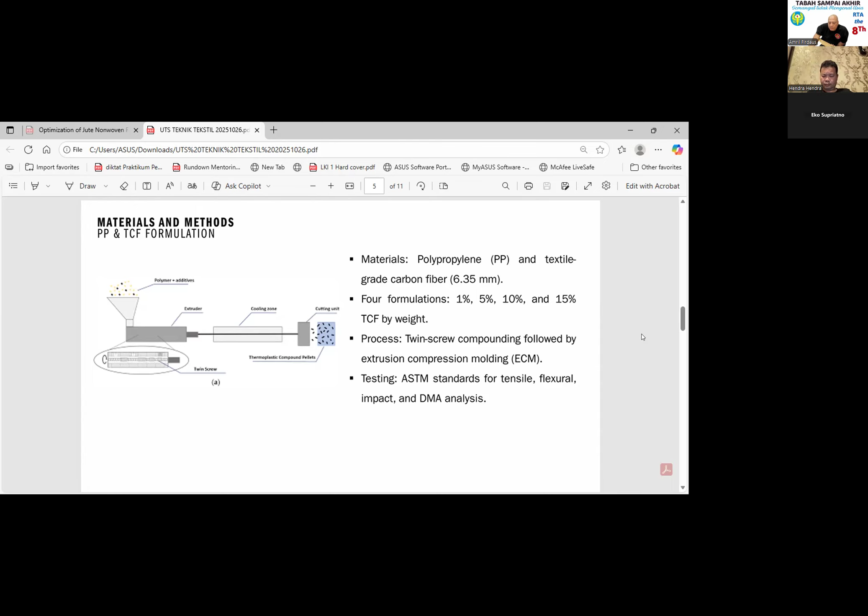So let's move on, Nadia. Now let's move to the results.

Starting with the thermal analysis first. The TGA measures how the material weight changes as it is heated. Every plastic after heating shows some reduction in weight, essentially identifying its thermal stability and decomposition temperature.

In the study, the research found that composite containing carbon fiber degrades at a higher temperature than pure polypropylene. This means adding the TCF makes the material more heat resistant, which is a good sign for long-term durability. The next test is the dynamic mechanical analysis, or DMA.

DMA looks at how stiffness changes with temperature. The storage modulus, which represents elastic stiffness, was found to increase with fiber content, especially at 10% and 15% fiber loading.

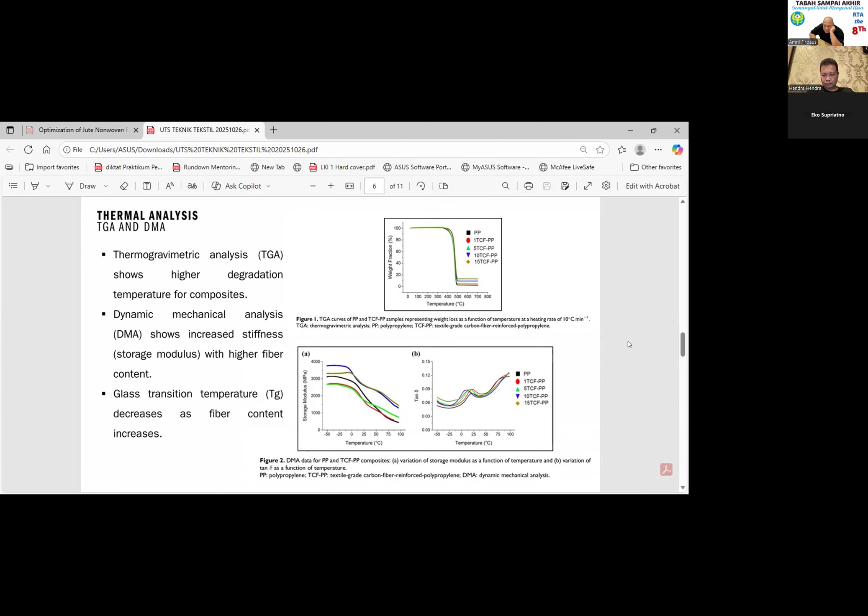The overall point here is that the TCF not only improves stiffness and heat resistance, but also changes how the material behaves dynamically. From the thermal point of view, the composite becomes more stable and better performing under heat and vibration, a great advantage for automotive and mechanical parts.

Move on to the next slide, about fiber length and morphology. Let's take a closer look at the fiber structure and morphology, because how the fiber behaves inside the polymer matrix plays a huge role in the final composite performance.

During the twin screw extrusion process, the carbon fiber experiences mechanical shear and friction as it mixes with the molten polypropylene. This can shorten the fiber, a process called fiber attrition.

In the study, after processing, the research found the average fiber length was about 0.18 to 0.19 millimeters, quite short compared to the original 6.35 millimeters. Interestingly, this fiber length remained fairly consistent across fiber loadings, from 1% to 15%.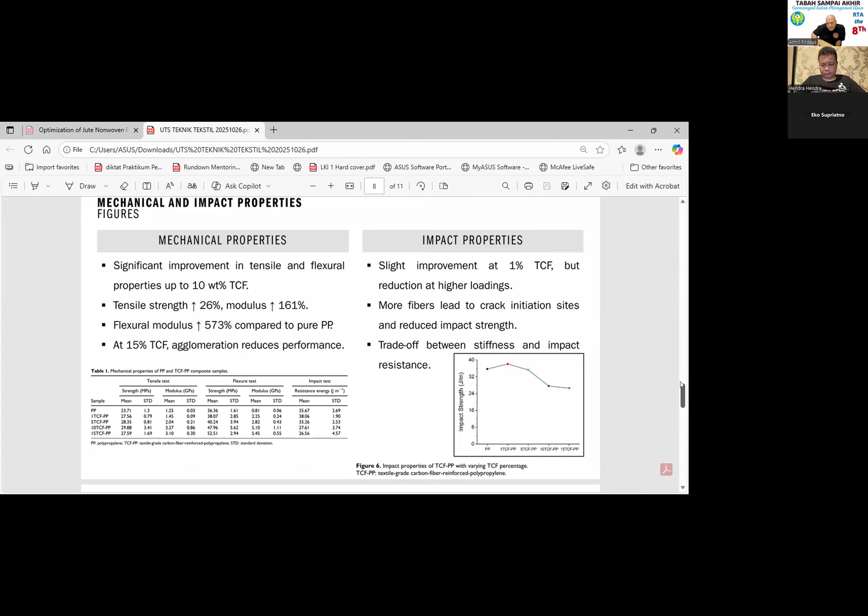So the trade-off is clear: while more fiber increases stiffness, it can also reduce toughness. In design terms, this means if you are producing a component that needs both stiffness and impact resistance, like automotive interiors, you might choose a moderate fiber content, maybe around 5 to 10%, depending on the required performance balance. This is a great example of how material science is often about compromise and optimization, not just maximizing one property. This can be shown by comparing, Nadia, next slide, with the commercial carbon fiber.

We take the research's comparison with Toray carbon fiber. So let's see how they stack up against the commercial fiber here. The research compared their 10% TCF PP composite with a previously reported Toray carbon fiber PP composite containing a similar amount of fiber. So here's what they found.

The tensile strength and modulus of the textile grade composite were actually higher than those of the Toray-based composite. That is an impressive result, showing that even a lower cost fiber can deliver great tensile performance.

But remember, on flexural strength and impact resistance, the Toray composite performed better. The reason is that the Toray carbon fibers were longer, around 0.5 millimeter, compared to 0.18 millimeter in the textile grade version. Longer fibers create a stronger network and improve load transfer under bending and impact.

Even so, the TCF-PP composite demonstrates excellent potential, especially considering its cost advantage. Producing TCF is significantly cheaper, and with further process optimization, like improving fiber length retention or using the side feeder technique, the gap could become even smaller compared to the original Toray carbon fiber.

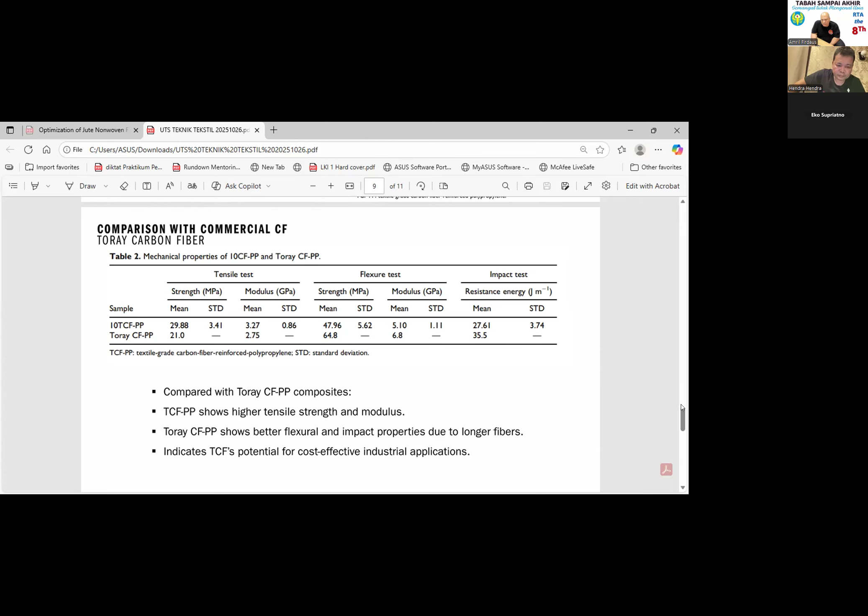So last but not least, let's conclude this presentation. Nadia, can you go to the next slide? Let's wrap up with the conclusion.

This research showed that textile grade carbon fiber can effectively reinforce polypropylene composite, providing substantial improvement in both mechanical and thermal properties. The best performance was achieved at around 10 weight percent fiber loading, where the composite demonstrated the highest tensile and flexural strength, good fiber dispersion, and stable thermal behavior.

Fiber not only improves stiffness and strength, but also enhances the composite's thermal stability, allowing it to withstand higher temperatures before degrading. However, higher fiber content like 15% leads to diminishing returns due to fiber agglomeration and uneven mixing.

From the microscopy results, we also learned that fiber-matrix bonding was excellent, especially at the optimal loading, with fibers breaking rather than being pulled out during testing. So the key takeaway is that textile grade carbon fiber polypropylene composite offers a cost effective, lightweight, and strong alternative to traditional composites, particularly for the automotive industry, where cost, weight, and performance must be balanced.

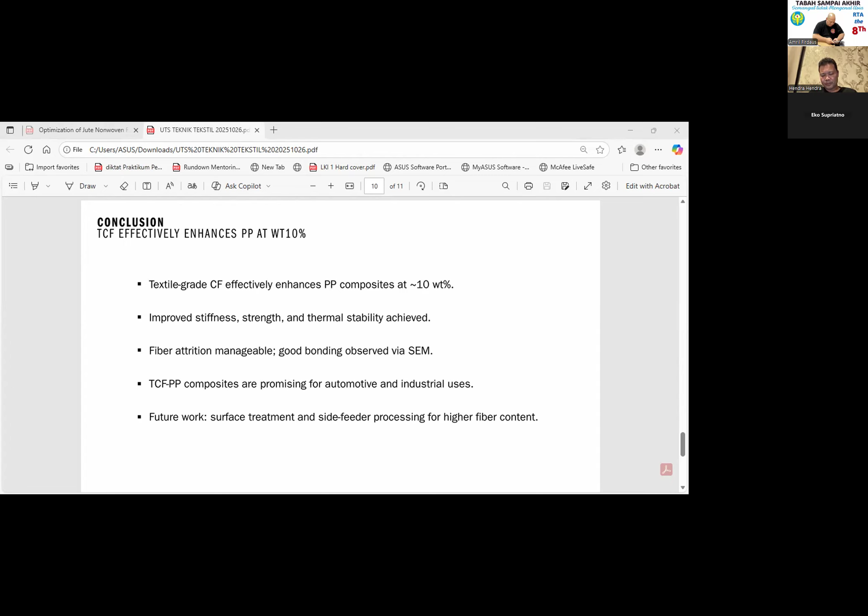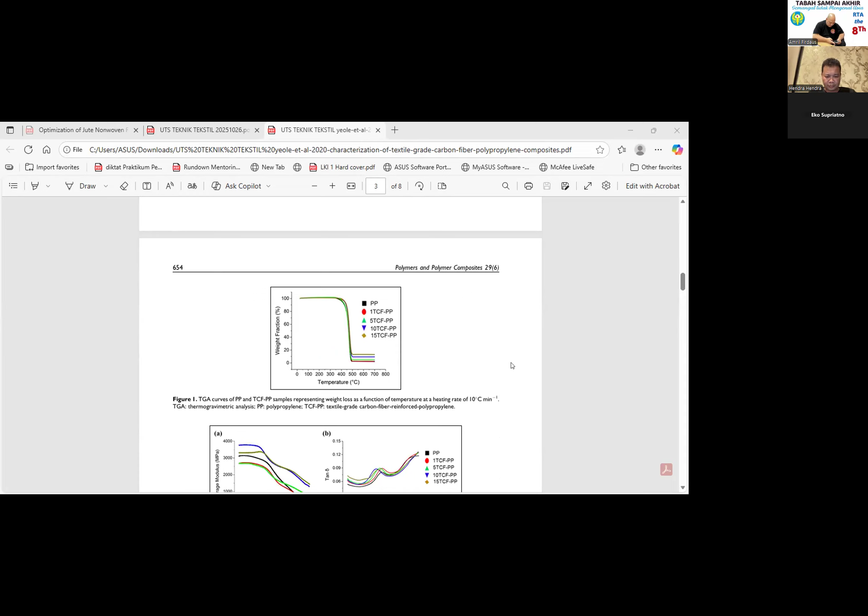Here we go, Nadia. It should show the microscopy or SEM there, to make it more clear. On figure 4, Nadia, page 5.

Oh, this is not fiber, right? This is composite. Yeah, this is the composite. So in general, the study is just to compare how the composite performs if not using the commercial carbon fiber coming from Toray, but coming from not industrial waste, but a kind of waste where the fiber is quite shorter, but the functionality is not really impactful to the performance of the product itself later on.

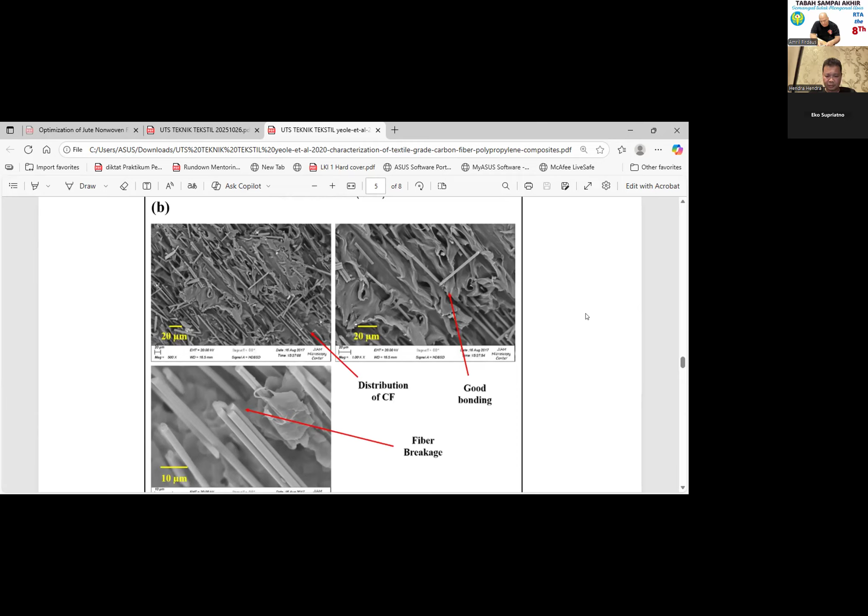Do you have another image except this? There is no other image of the product, that's why I just used one from the internet of the car. So what is the application of this product? The application can vary, can be many, like automotive spare parts. The point is the final product is like a sheet, not a single fiber - it's a composite. It's like the plastic, but plastic with carbon fiber inside. I see, now I got it.

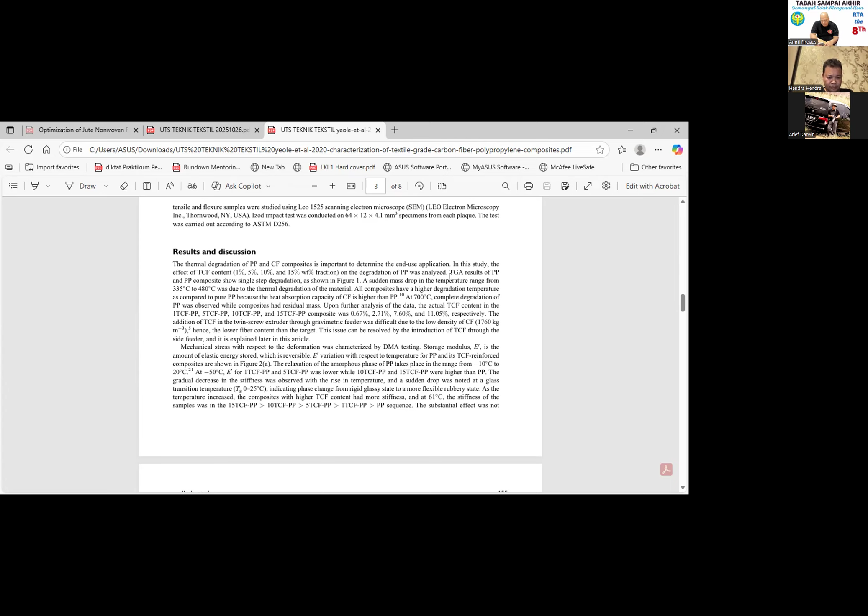Okay, maybe is there any question from the audience? Yeah, I have a question, Pak Eko. I think this is also the first time I heard the terminology textile grade carbon fiber. So what does that mean? Textile grade sounds like food grade plastic, something like that. What is the difference between textile grade and other grades of carbon fiber?

That's the first question. Second question, it looks like the carbon fiber is processed in staple form, which is a short fiber. If I'm not mistaken, the paper mentions around 6 centimeters or 6 millimeters. The question is whether different sizes of the staple will impact the strength of the composite. Okay, that's my question.

Okay, let me answer the first question. Yes, the concept of textile grade is like food grade - it's the second grade of the things we produce, which is normally not valuable because now it's moving to the size of the fiber itself, very short. Only 0.18 to 0.19, compared to the original one which is 6.35 millimeters. So you can imagine 0.18 millimeters against 6.35 millimeters.

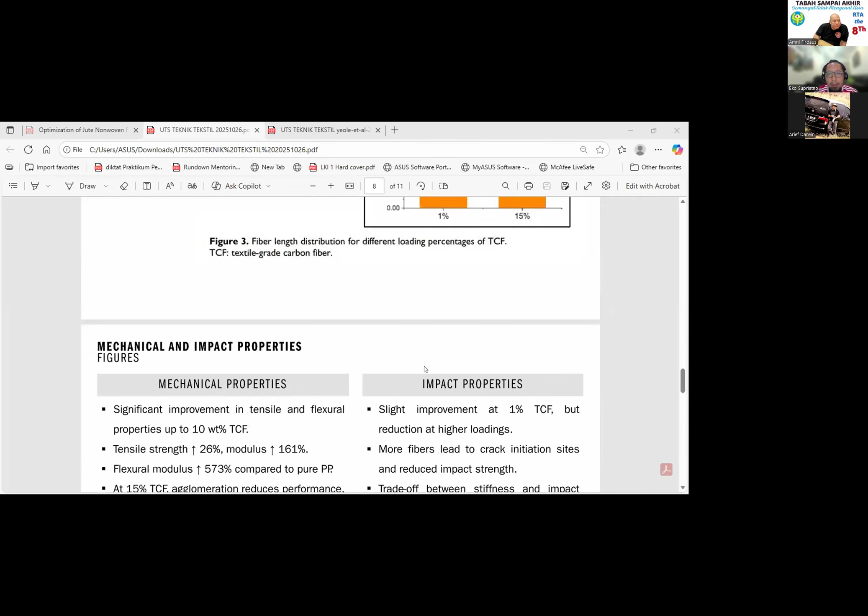Yes, this is the explanation. So you are correct. The attrition is 0.18 to 0.19 compared to the original one.

6.35 millimeter. The next question is about whether the fiber is longer and evenly spreading during the molding process. The conclusion says this process will help the fiber spread more evenly, making the performance stronger. So the answer is yes, the longer fiber, the better it is.

Okay, thank you. But to be honest, I'm still not clear about the textile grade of carbon fiber. Maybe Pak Hendra can help, maybe the chemical chain or polymer chain is different from other non-textile grade carbon fiber. Maybe Pak can explain.

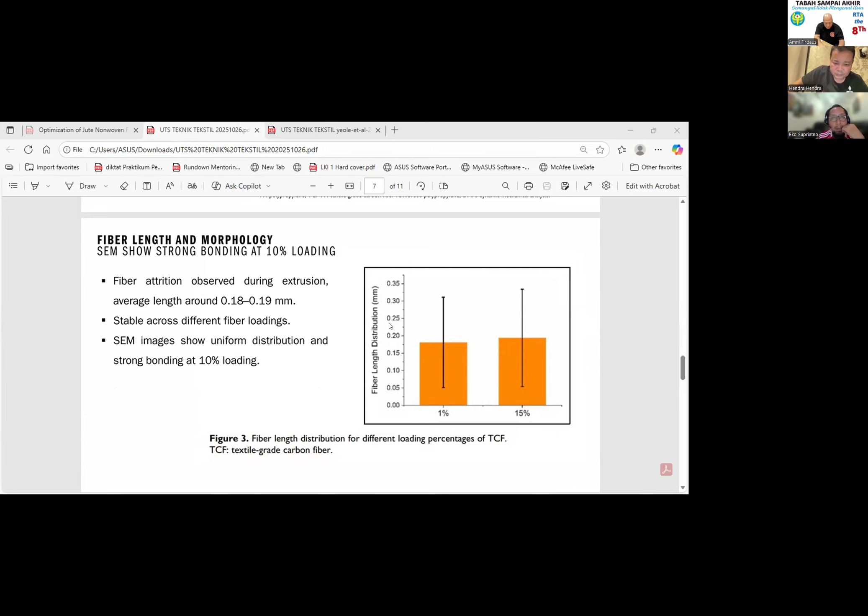Let me check - they only measured the strength, the tensile test here. So there is no information about how the fiber is distributed, whether it is random or aligned in a particular direction.

I think it's random. Okay. Is there any other question?

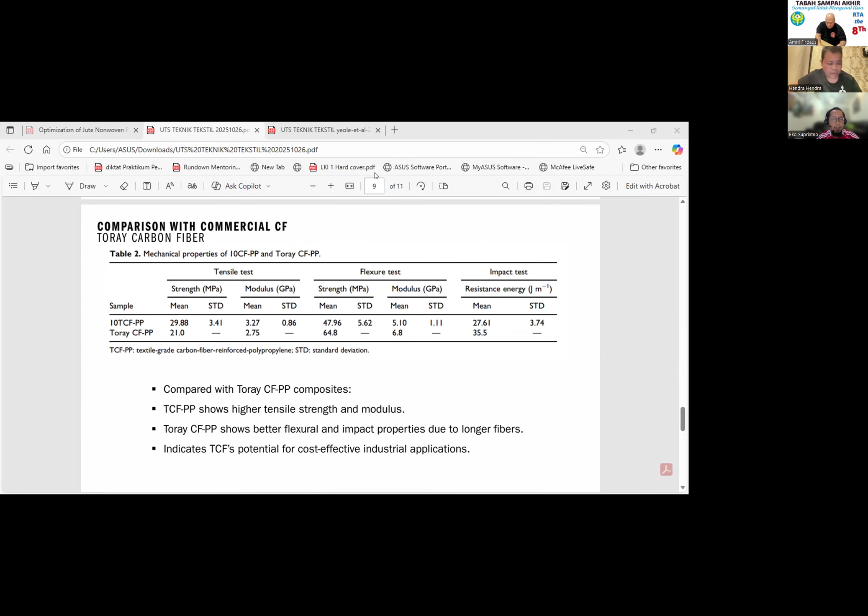Pak Eko, thank you very much for your presentation, and I hope we can continue this kind of presentation, as a board member of SACSEM.